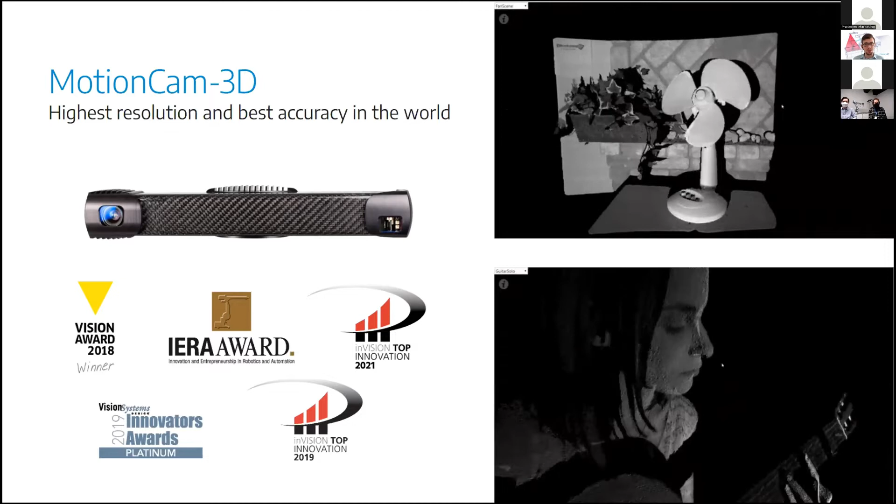So with new Photoneo patented technology called parallel structured light, we bring the state-of-the-art quality and resolution of structured light scanning into the 3D reconstruction of highly dynamic scenes. This novel patented technology uses a clever sensor design which performs the acquisition in one snapshot as opposed to the sequential scanning of a standard image sensor. This means that the parallel structured light method practically freezes the 3D scene in time.

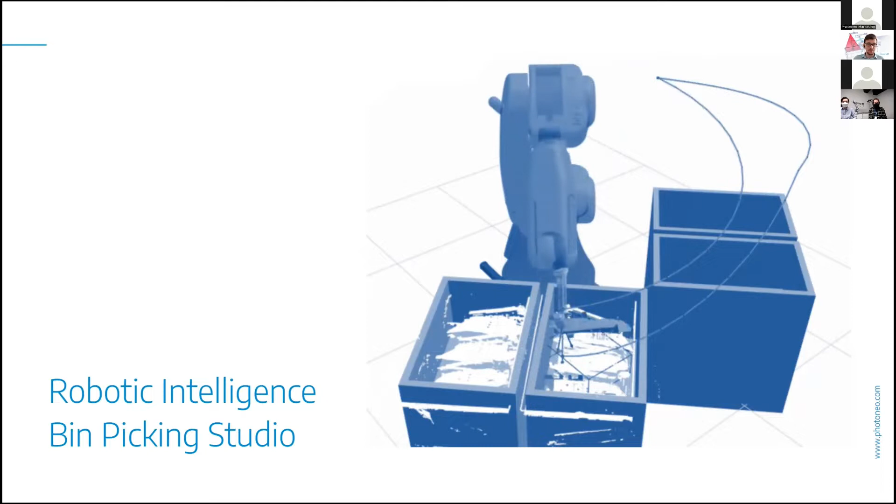Our motivation is transforming the experience and knowledge from projects delivered by Photoneo into a product that enables our partners to deploy robust and reliable bin picking applications. And this is all allowed by Bin Picking Studio. Photoneo is also offering multiple localization approaches for different industrial areas, such as general industry, machine tending, plastic industry, foundry, logistics industry, and parcel handling, or even the apparel industry.

In Photoneo, we believe that the best outcome from 3D vision guided robotics applications lies in close cooperation with robotic integrators and our customers. Therefore, we always want to express the possibilities, but also limitations when it comes to the customer requirements on the bin picking application.

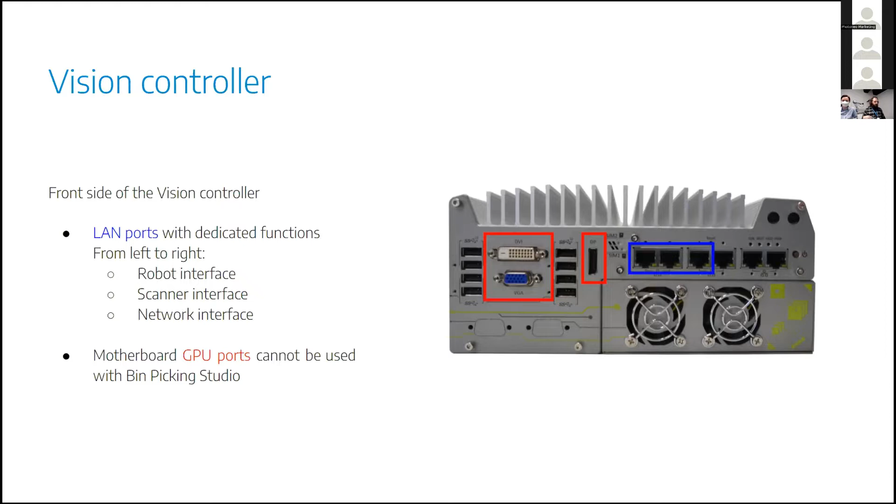So the whole topology consists of at least 4 parts, the minimum: the vision controller, PhoXi scanner, robot controller, and the robot itself. Of course, as mentioned, you can have more than one scanner connected to the vision controller via switch, and then you can have the vision controller connected via other means to another PC, which can be controlled.

The data from the scanner are used to generate the point cloud, where the localization engine is searching for the parts you want to find there. This information is obtained via the vision controller to get where the part is in 3D space, and then this information is transferred to the robot controller to calculate a precise trajectory, and then the robot controller will guide the robot movement.

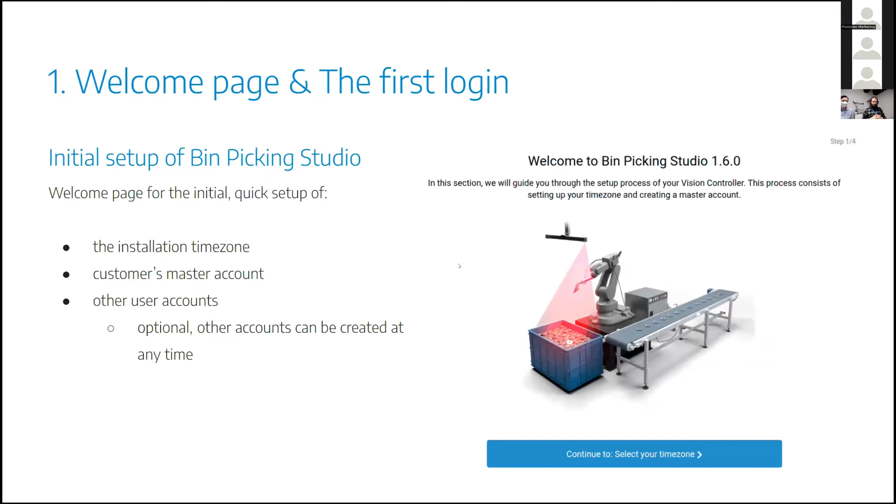So the first thing that you will see is the welcome page, where you can set up your time zone and then set up your account. You can set up multiple accounts with different privileges. You can also configure this later. Then you will be asked to log in. So your solutions are always protected if you use the password.

So then you will see the main Bin Picking Studio interface, where you can see the solution list and all other panels. The deployment page will take you directly to the deployment of the solution. There is also this PhoXi interface, which is the interface of the 3D scanner. Then you have the network page, which is necessary to set up before you start with the bin picking, because all the communication is handled via TCP/IP. So we need to set up the IP addresses correctly so the scanner and the robotic controller can communicate with the vision controller properly.

There is also this menu button, the 3 horizontal lines in the top right corner, which offers some additional options. There is the account management, where you can set up more accounts or change the privileges. The most important one is the documentation, where you can find also this presentation and all necessary information about the Bin Picking Studio and all of its parts. There are also pages dedicated to each robotic brand, which will help you to set up your solution with the particular robot from the brand.

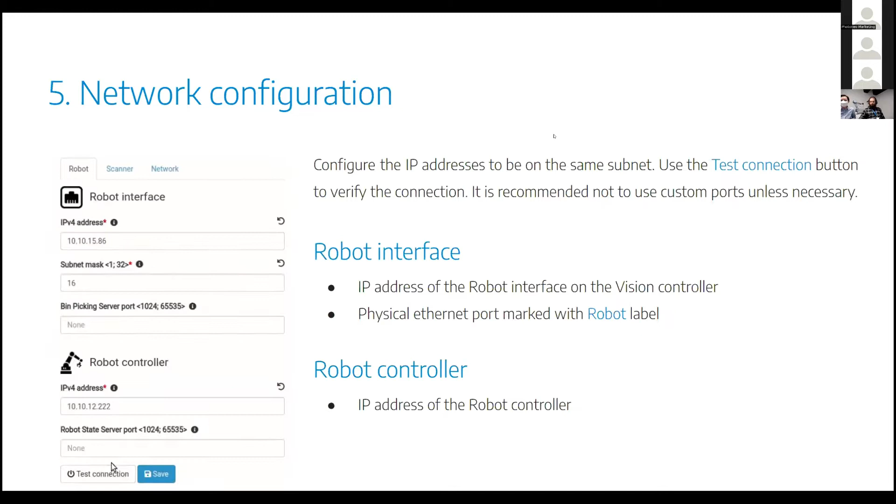Yeah, okay. If you are not sure about what you are doing, or whether you have the right IP address, you can always go through the documentation, where you can also find this training material of BPS. Okay, when you set up your IP address, there is this button called test connection. If everything is set up properly, you will receive this message that the robot is available.

The next step was PhoXi, which is the connection to the web application that controls the PhoXi 3D scanner. There is also another application called PhoXi Control, which also helps to set up the scanning parameters.

The web interface is just for really quick visualization. If you have really easy parts, it's easy to set up with just the web interface. But with more problematic or difficult to scan parts, we recommend to open PhoXi Control and set up your scanning parameters there.

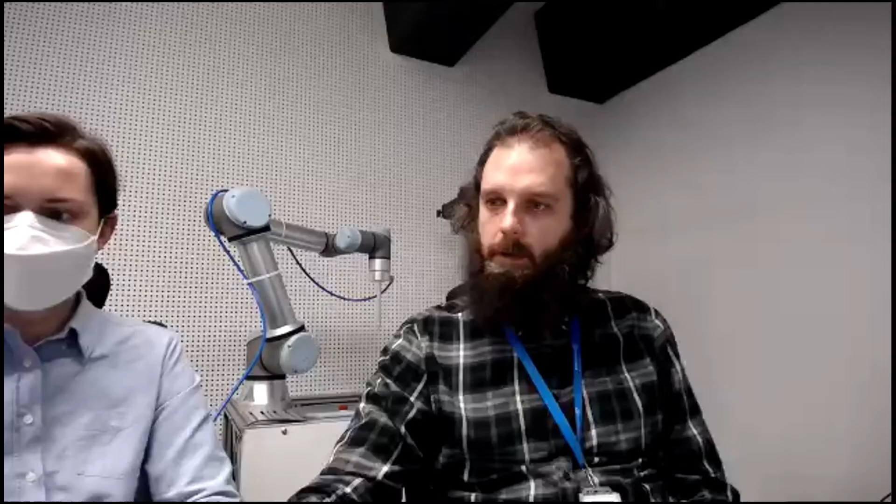So now we will go to Bin Picking Studio itself and show how everything we mentioned in the presentation really looks in Bin Picking Studio. So now we are in Bin Picking Studio itself.

Okay, so this is the solution page where we can see the list of our solutions. Each one has its unique ID, the robot used, and all the flags and all the actions. Here on the bottom, we can see the news about the new Bin Picking Studio 1.6.0. So it's all listed here if you have experience with the previous versions of Bin Picking Studio.

We have the deployment page. Here we can immediately choose from the ready solutions the one to be deployed. Next is the PhoXi tab. As mentioned, here is the quick access to our 3D scanner. We can trigger the scan, and we can directly have a visualization of the point cloud we have.

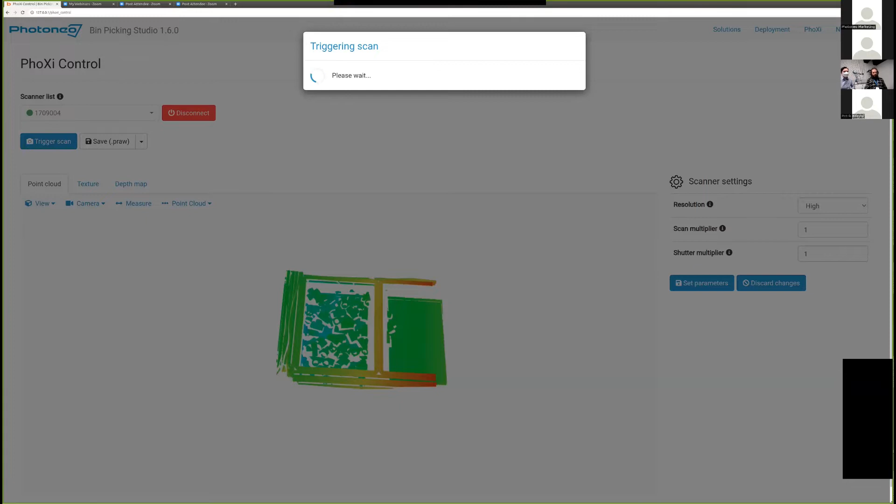Also, we can choose to save the point cloud in different formats. Maybe I can change the scene a little bit and rearrange our parts. See that, they will appear in the other video. So as we change the scene, immediately after we trigger the scan, we can see that we had the scene change, and we have a bit different point cloud now.

Then we can show you the PhoXi Control application. So you can see the point cloud here on the screen now. So we can check if we are satisfied with the point cloud, and then maybe modify some settings. You can see some selected profiles. There is one for strong ambient light, shiny material, default. Usually default should be enough for most of the parts, but feel free to check the other profiles if needed.

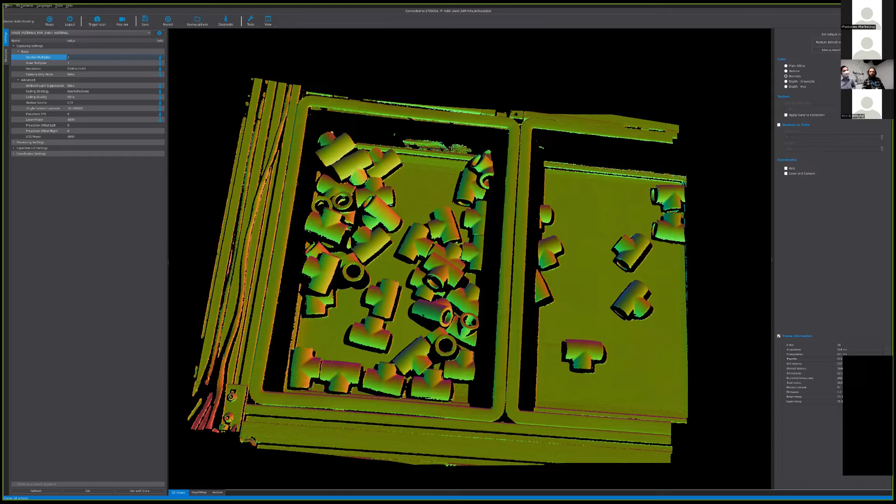You can also check this to have normal sticks, and you can see that almost every point has its normal shown. Is this what you asked for? The resolution can be changed in this left panel. It's the problem.

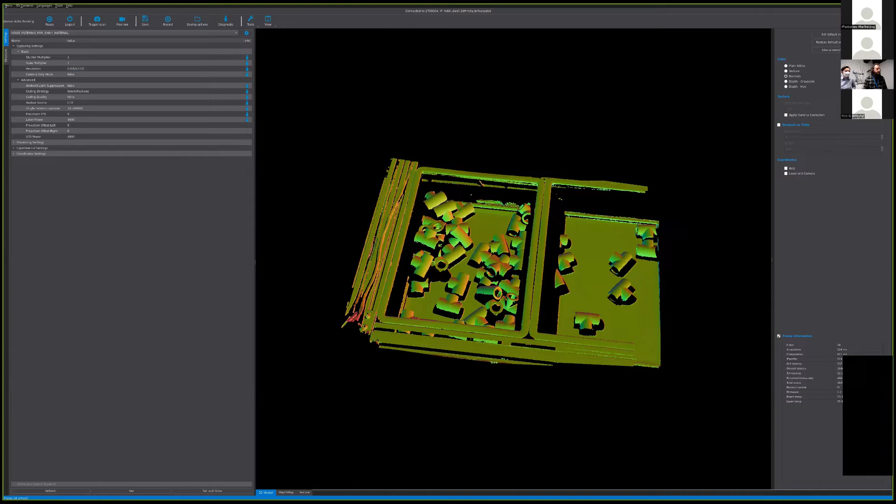I know it's a bit small maybe for you to see, but here are all the three options that were in the Bin Picking PhoXi page: the shutter multiplier, scan multiplier, and the resolution. For example, we can change the resolution to half resolution, set the parameter, trigger the scan and see the difference in the point cloud. The parts are quite easy, so there are fewer points, but the point cloud is still quite okay.

Yes, so the PhoXi Control is not the scope of this training, but we can maybe go back. We just wanted to show you that all the scanning options can be changed in the PhoXi Control. That is accessible and installed in the Vision controller.

Yeah, we understand that they are small, so I don't know how to increase them or change it for better. So okay, we will now continue with the presentation, I think.

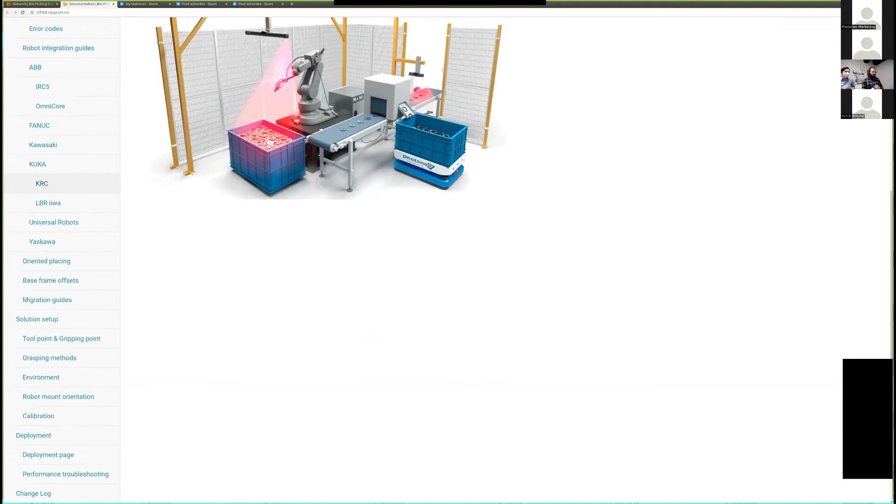So we are again in the Bin Picking application, and here in the top right corner you have this options button where you have the account management and so on. And here, directly on the vision controller, is the documentation, where you have everything set, as I mentioned. Every solution step has its own page here.

We will get there. Every robotic brand has its own page here where you can access all the information regarding connecting your robot to Bin Picking Studio and using Bin Picking Studio with that particular robot. Also, you have this presentation available here. So the whole presentation is here as well, so you can access it even after we finish this training. So let's go back to the presentation.

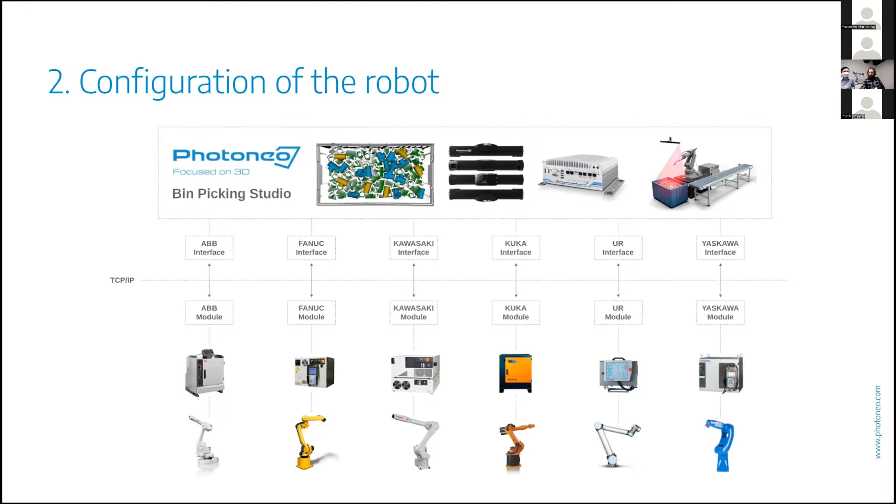Here is the list of the supported robots in Bin Picking Studio. As I mentioned, the robotic module is for each robotic brand, and we can send it to you on request at our support email. The whole guide on how to set up your robot with Bin Picking Studio is in the documentation, as I show you with the Universal Robots example. We have one here. There is a whole list of necessary steps to connect your robot with Bin Picking Studio and the vision controller.

There are also the example programs, really easy ones. The first one is for easy bin picking, the second is a multiple vision system example, and the third one is the change solution example. So for your particular application, you can get inspired by these three robotic programs and write your own program for your specific needs.

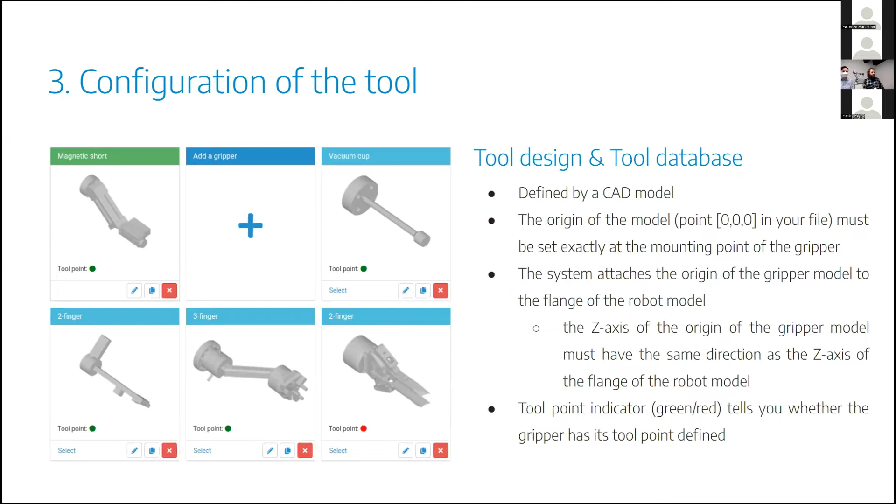Here you can add your own model. The dimensions of the model must be the same, or as close as possible, to the real ones. But keep in mind that the model itself will be used for collision checking calculations. So it's good or almost necessary to have this model as simple as possible, a few kilobytes, and the origin of the gripper must be in the mounting point of the gripper. This can be changed in, for example, MeshLab, which is also pre-installed on the vision controller.

There is a question. Is it possible, in order to ideally adjust the field of view scanning volume, to project the laser and see the edges where it's mounted? Or else, how would you suggest? Very easily, you can check it in the PhoXi Control application itself. But this feature is not available in Bin Picking? Bin Picking controls the PhoXi scanner in an interface that has some limitations for setting up parameters, but it takes the point cloud generated and visualized in the PhoXi Control application.

So in your application you can prepare the solution, then open the PhoXi Control application, arrange the scene, check the parameters, and make sure that everything works as you desire. Then you can check in the vision system page, we will get there in the afternoon, whether the localization is working well. If not, you can adjust the scanning profile and scanning parameters again in the PhoXi Control application, get back to the vision system in Bin Picking Studio, try the localization again, and see if everything works. By repeating these steps, you can get the best possible scanning parameters and localization profile, and then you can proceed further and finish the solution.

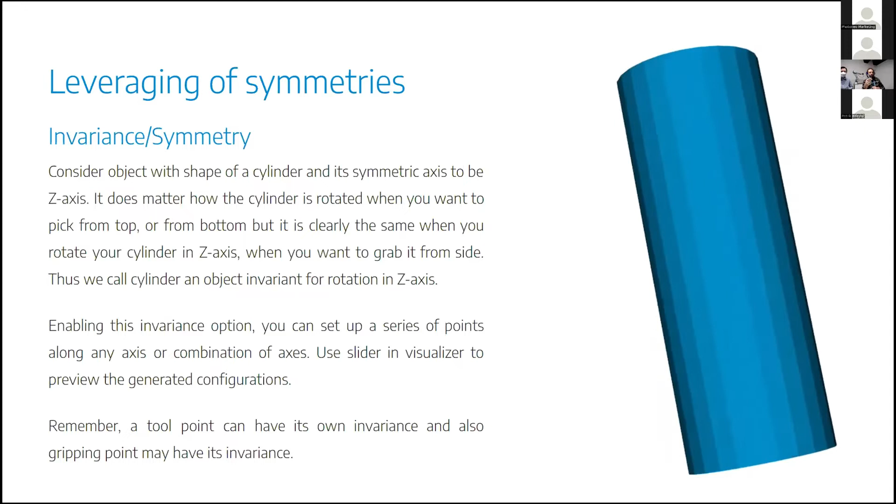But if we turn on the rotational invariances in Z axis, like we showed you before, then all the options become available, so the gripper can be rotated, and we will gain more options for how to pick the parts. In this example on the screen, the z-axis invariance is also enabled, and the number of steps is 8. It's not a good idea to have too many steps for these invariances, because then the algorithm will have too many options from which to choose to calculate the trajectory to pick the object. So it's good to have some invariances, to have more options for the robot to pick the part, but not too many.

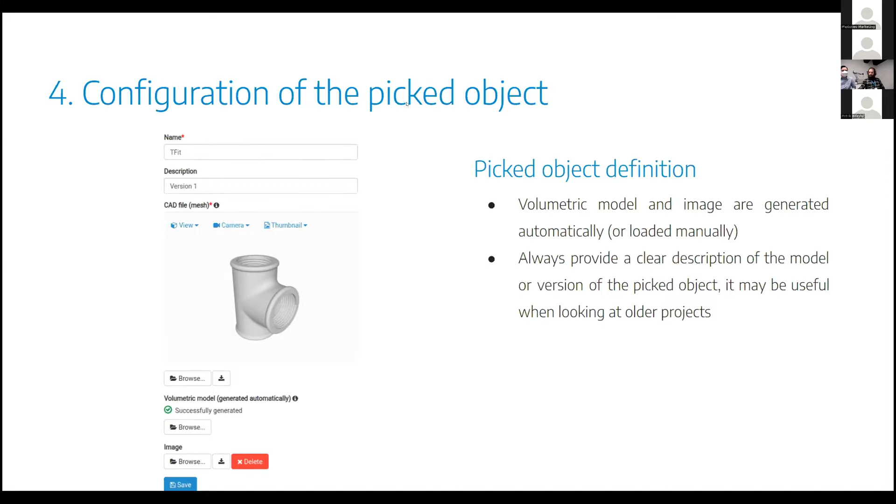Okay. It is mentioned also here that the size should be low, and just make sure that the model is whole. Like in this example, you can see there is a hole in the 3D model, and it won't work well, or even won't work at all when you have a CAD model like this. So they should be enclosed, and in case they are not, the volumetric model might be incorrect, and you will have some problems later.

Okay, so I think now it's a good time to have a maybe. Okay, we will see just another question.

Maybe Patrick can. Yeah, the first one I asked Patrick to answer, and there is another question: what if our objects are always the same model but in many different colors? As you may know, the PhoXi 3D scanner does not work with color. It generates a point cloud from the objects. The texture, notice that it's black and white.

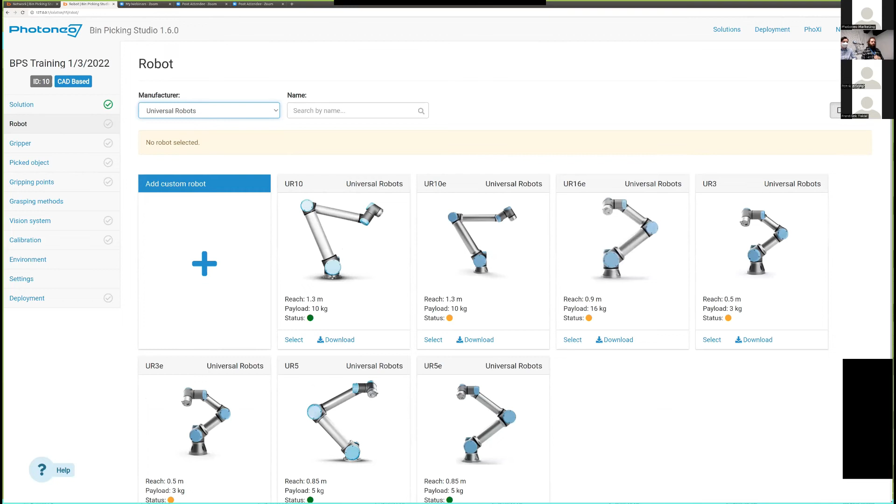So here you can see there are a lot of available robots we can choose from, but we know that our robotic brand is Universal Robots, and our robot is this one. So we can just select it. You can notice that it has a green dot, which means that it was tested in our headquarters. That's it. The robot is selected.

Next, we'll move to the gripper. Here we have a few grippers already available, but we will add a new one as in the presentation. So we just click add the gripper. The name, so we can recognize it, will be vacuum, for example. We will browse the disk for the STL file. So it's this one. We can just open it. When we hit save, it will generate the volumetric model of the gripper.

And in the visualization, we can zoom it and check if it corresponds. You may notice that the origin is in the mounting point of the gripper. So here is the place where the gripper is mounted to the robot. So you can check here that it's okay. Next is the tool point page, where we can change the position of the tool point, so where the gripper is touching the picked part.

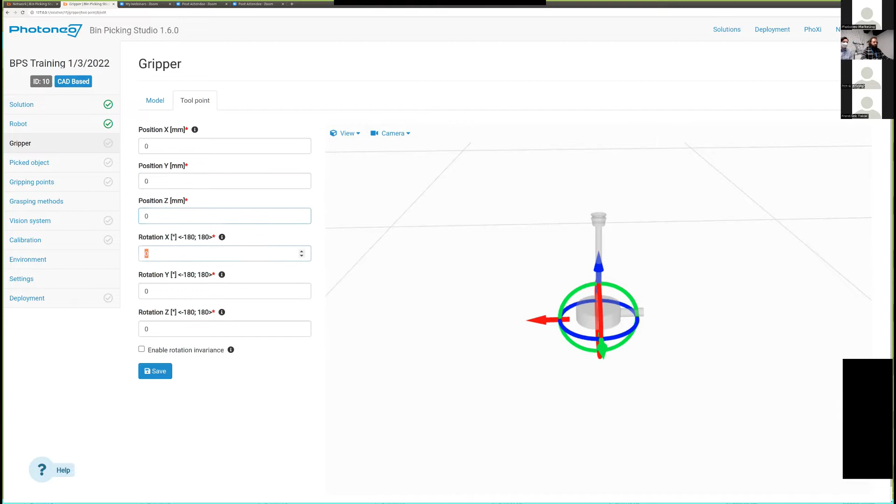As mentioned in the presentation, we can either use the visualization and these arrows to move the tool point in 3D space. We can rotate it and do whatever we want, or we can use these fields to directly type something there and change the position. So we know that it's a suction type, so we know that the touching point, or the tool point, is on top. So we can move it like this. The red dot is the actual tool point.

Don't forget that this setup is not permanent, so we can change it anytime later if we, for example, discover that the tool point is too deep and it's pushing into the part, or it's too far away from the part, so we can then adjust it and move it according to our needs. I think I will move it a bit up, like this.

You may notice, or maybe not, that the model is not exactly like the one we are using. The end is made from rubber, and it's dilating. So when we pick the part, it gets pushed and shorter. That's why our model is shorter by this length, and that's why we just place the tool point exactly at the edge of the model. So we will avoid collision of the gripper with the point cloud. Let's put it at 180, and if needed, it can be changed when you perform the deployment.

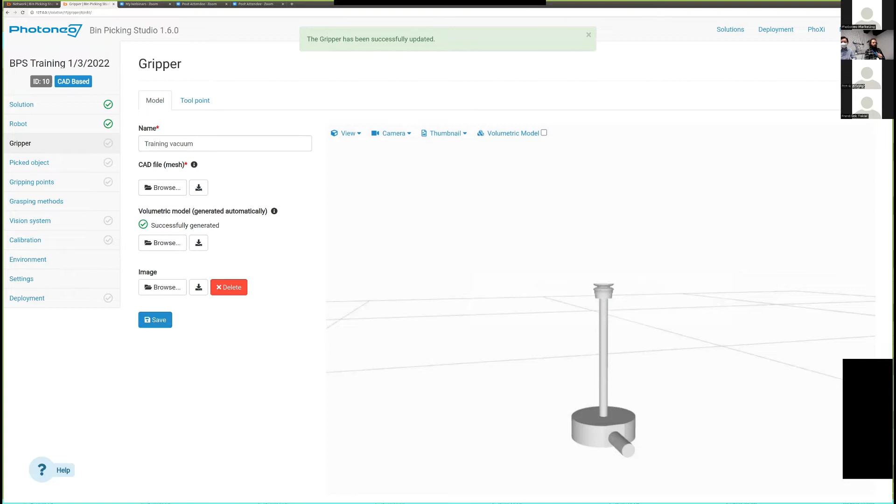When we are satisfied with the settings, we just hit the save button. The tool point has been updated and everything is saved. So we can save the gripper and we can proceed to the picked object. As mentioned, we can add up to four objects into BPS Studio. Adding a picked object is similar to adding the gripper.

Just click to add the object. We can name it; in our case, it will be fitting, for example. We can add some description, but it's not mandatory. The only mandatory thing is the CAD file. So let's find it. For us, it's this one. You can notice that the file size is 487 kilobytes, so it's a really small file. Similarly, the gripper has only 384 kilobytes, so it's a really simple model. So we'll open the file. It's saved to generate the volumetric model.

And in visualization, we can check if it fits. Yeah, we can check. Yeah, it's really our object. So we can also choose the thumbnail like this. Set the thumbnail to the current view, and when we save it, the thumbnail will be as the one we saved.

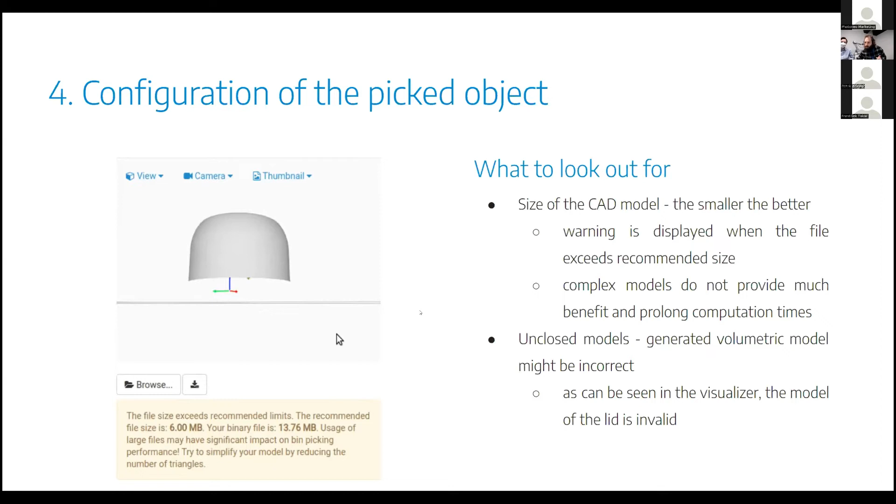The priority can be set up as well for each gripping point. It's not the priority to pick objects by that gripping point, but to pick a particular object with that gripping point. I'm not sure if it was well said. Let's say it like this.

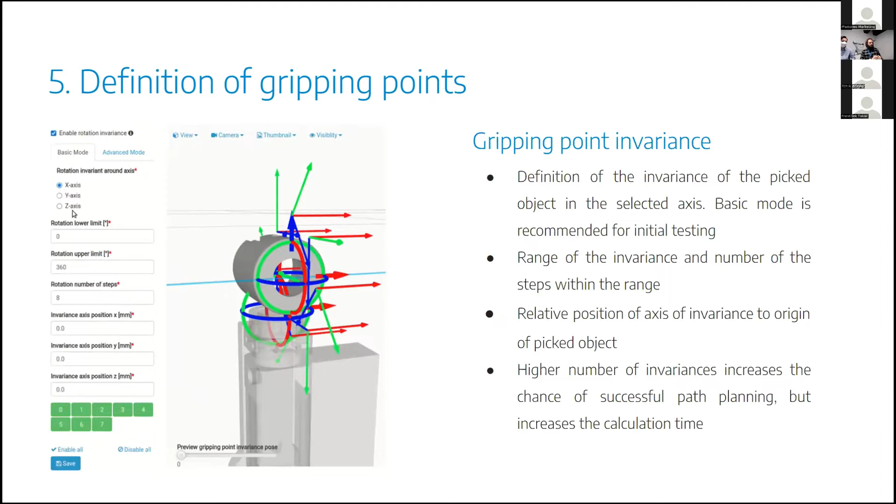You can also check the presentation. They are using a magnetic gripper, and the part is symmetric in the whole X, so it's easy for them to create the invariances over the gripping point. It's similar to the invariances with the tool point. We want to have multiple options for how to pick the part, but not that many, so the calculations are quick and the cycle time is low.

There is an option also to teach gripping points. It's often used with difficult parts or difficult grippers. It cannot be done directly. You need to run the calibration, which we will do in the afternoon. And then you can teach the gripping points: you attach the part to the gripper as you want it to be picked, and then scan it and teach the gripping point in the Bin Picking Studio.

Okay, there is also an option to achieve an oriented placing. As you may notice, I mentioned that each gripping point and also its invariance has its own ID. So we are able to send to a robot the combination of numbers, the IDs of the gripping point, so the robot can exactly know how we pick the part. So for example, if we took our part, we can call this gripping point 1, and this will be gripping point 2, and this will be gripping point 3.

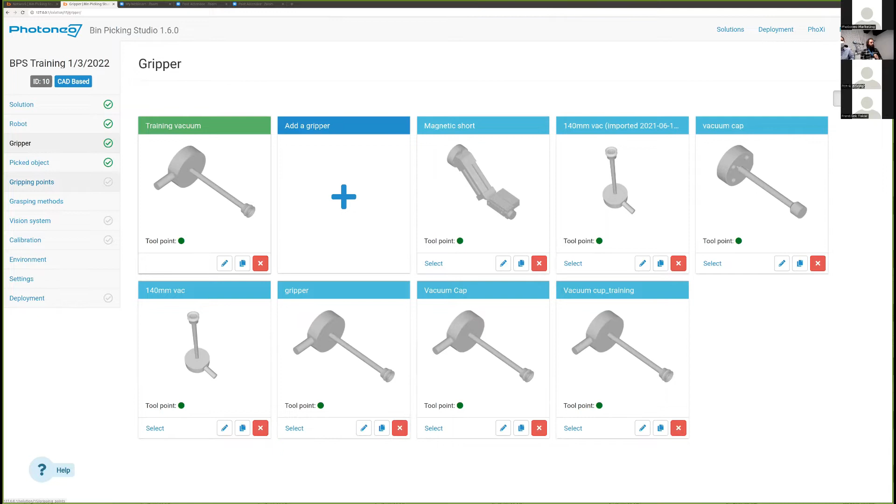Okay, so we are back in the Bin Picking Studio application. So we jump to the gripping points. New gripping point. We can choose here our picked object, since we have only one, so the first one is selected, and its ID has already been selected. We can change it, but it's not necessary. And now we click add new gripping point. So here we are in the interface. Immediately the visualization is giving us the model of the gripper, the model of the part, and you see they even connect in some way. It's not the ideal one, but still.

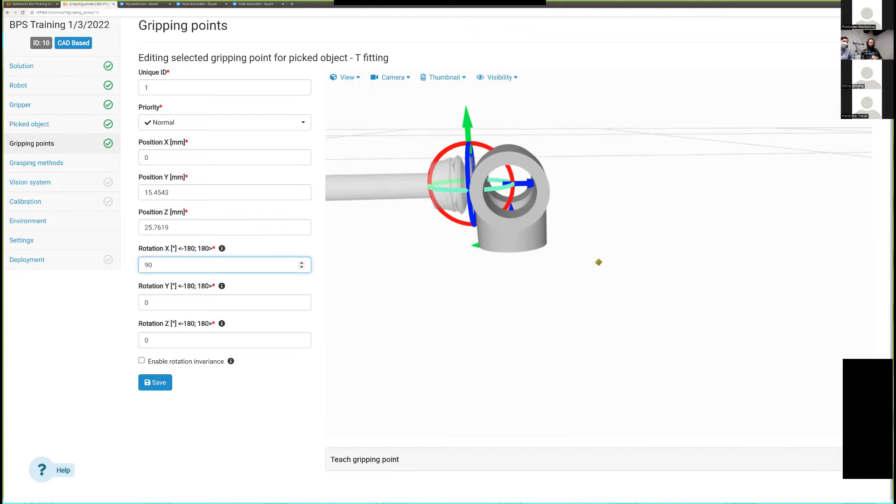So now we can position our gripper in the way we want the part to be picked. So let's try to rotate it. We want to pick it from the side. Yes, so we can use the numbers here or use this. So we know that we want to pick it from the side. So let's move it like this and move it a bit closer. Again, if we made some mistake or put it too far inside or too far away, we can adjust it later after we test the deployment.

So let's see. Let's have it like this for now, and let's turn on the rotational invariances. Again, the default is X, 8 steps and 360, a full circle. You can preview the invariance. We can see that no, this is not a good idea for us. So let's try Y. Well, this is not good either. So let's try the third option. Okay, we are getting better, but the rotation point is not where we want it to be.

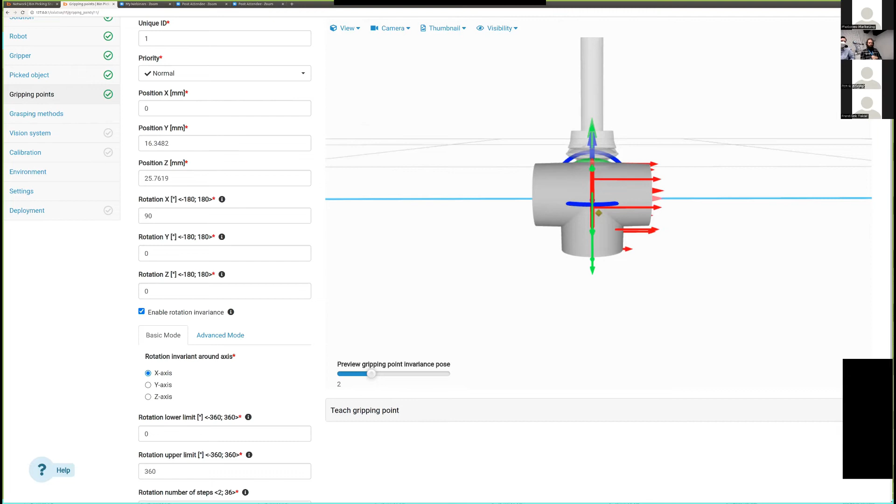So we want to move it inside the part. And like this, let's preview this. Oh, okay, it's much better. But we need to adjust it a bit more. Okay.

No. But we know that 360 is not good for our part, because from the bottom there is a hole and we won't be able to pick it like this, of course. So that's why we limit this to just 180. So let's see how it looks now. Yeah, this is what we want to achieve. Just pick the part from this radius where there is an option for the suction cup to actually attach.

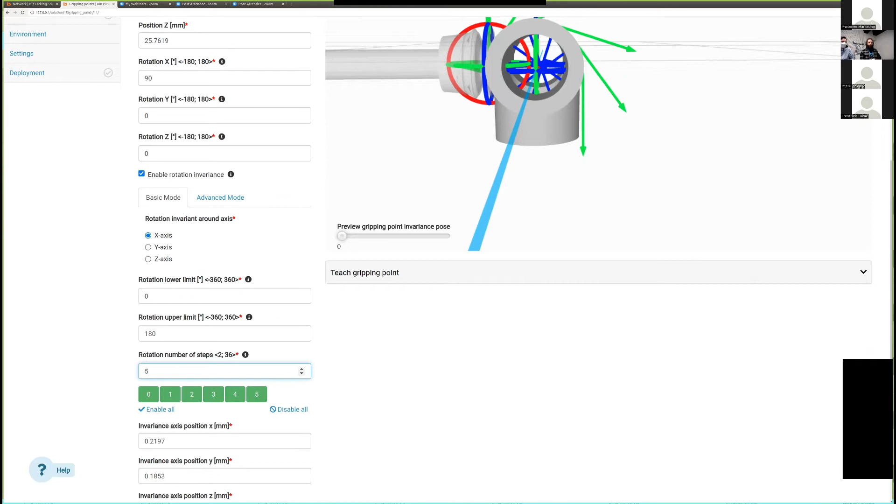So, also in this case, I think it would be better to lower the number of steps, because 8 is, I think, too much for this really small part. If it were larger, obviously it would be better to have 8 points. But for this, I think maybe 5 should be enough. But let's see how it looks.

Yeah. Now it looks quite okay. So when we are satisfied with this gripping point, we just hit save, and the point is updated. We get the green tick, and this setup is complete.

We will now conduct the grasping method. We will switch to the presentation again, show it in the presentation, and then we switch back to the solution and show it in the Bin Picking Studio application.

So, grasping method. In 1.6, this page got a new look. You can now set up multiple grasping methods from 1.6 on. Before, there was only one per solution. So now you can set up a grasping method for each vision system separately. It's very important to choose the correct grasping method. It consists of 5 mandatory waypoints.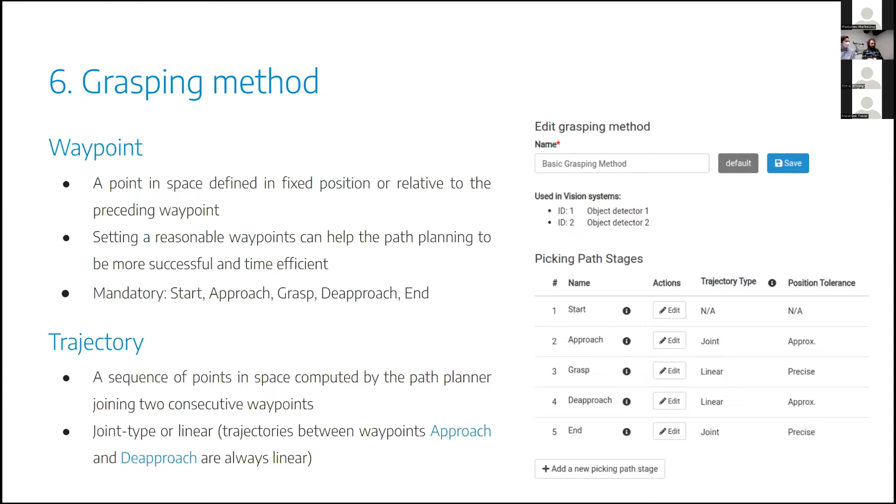Yeah, most collisions happen in the bin area, so that's why the grasp should be more precise, and the movement there should be linear, so we avoid all possible collisions. When the robot is outside the bin and there are no other objects, the trajectory can be curved, because there should be no obstacles where the robot can collide. Okay.

So let's go to the start position. As mentioned, it is the start of the bin picking routine. It's defined in the robot controller. Usually it's the same waypoint as the end one. It's called by Bin Picking Studio via the initialization procedure. And as I mentioned, it's usually defined above the center of the bin.

Then we have the approach. The gripper is moving to the position above the part to be picked, so it's prepared for the actual picking. Usually the found gripping point offset is used, so that we tell the robot to go above the found part and then do the grasp procedure to actually pick it.

On the right there, you can see that the type is approach. We can choose the origin of the relative offset. Mostly the found gripping point is used, but you can choose the other one, the robot base, depending on your application. Then you put the relative offset value in millimeters and choose the position tolerance, and whether the trajectory is linear or not. You can also call some procedure if needed.

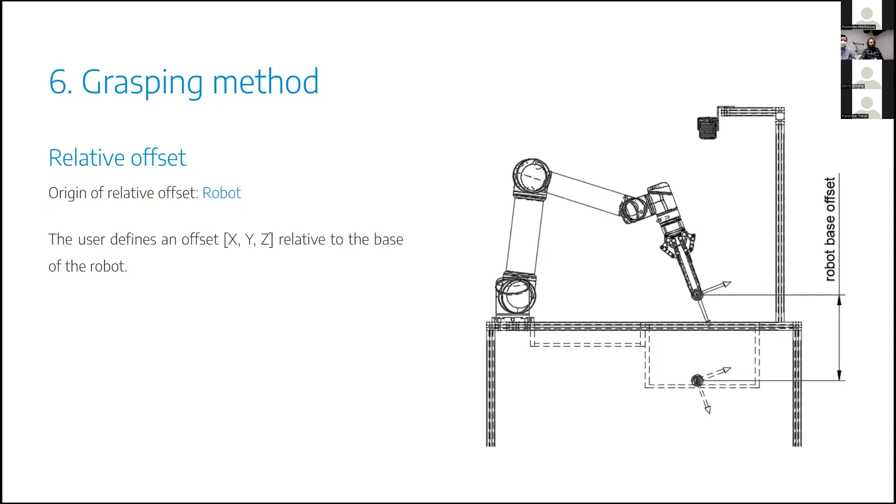Okay, so the next mandatory waypoint is grasp. It is the gripping point of the object that is ready to pick. So in this point, you can call the procedure attach, for example. In our case of vacuum, attach will mean that we will turn on the vacuum and attach the part to the gripper. In the case of magnetic, you will turn on the electric current to start the magnetic gripper.

So we can probably move to the deapproach. It's different from the previous one. So when we approach the part and grasp it, now we want to move it. Now it's a good idea to think if it's a good idea to again use a relative offset of the found gripping point, because in this case it will go like this. And possibly your workpiece will collide with other pieces in your bin.

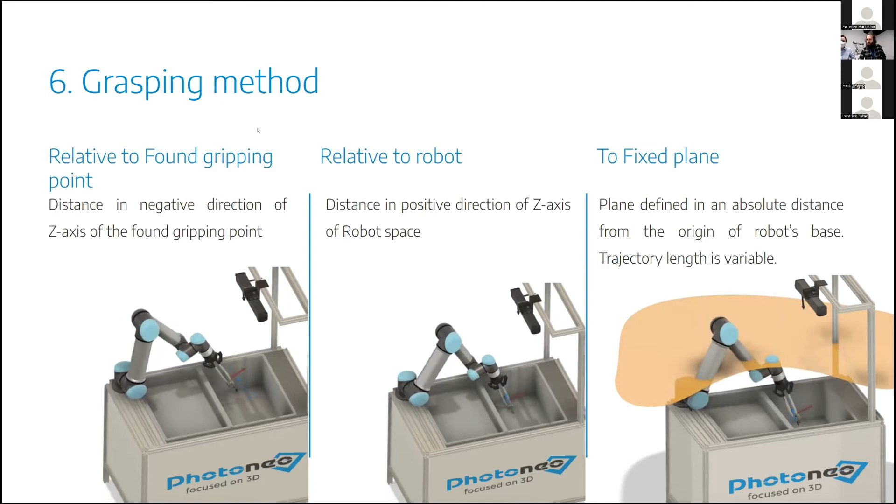Hopefully, we answered your questions. Okay. I move back. No, this is the fixed plane. No. That's what we just explained, yeah, that this is used when we have a really deep bin.

And another thing is when you are defining the start and end position, the best thing to do is to define the start and end position close to the bin. So you are sure that the trajectory is not calculated over the whole space, but you will reduce the space and you will save some cycle time. Also, as mentioned, if you set your start and end position above the bin, it can be used as a relative offset point to help pick parts that are close to the walls of the bin.

So here are some. So the endpoint, as mentioned, is usually where the start is, the end of the routine, and it's defined in the robotic controller. Yeah, there is also an option to use as an offset point some custom point defined in the 3D space. The space is calibrated, so we will do it in the afternoon.

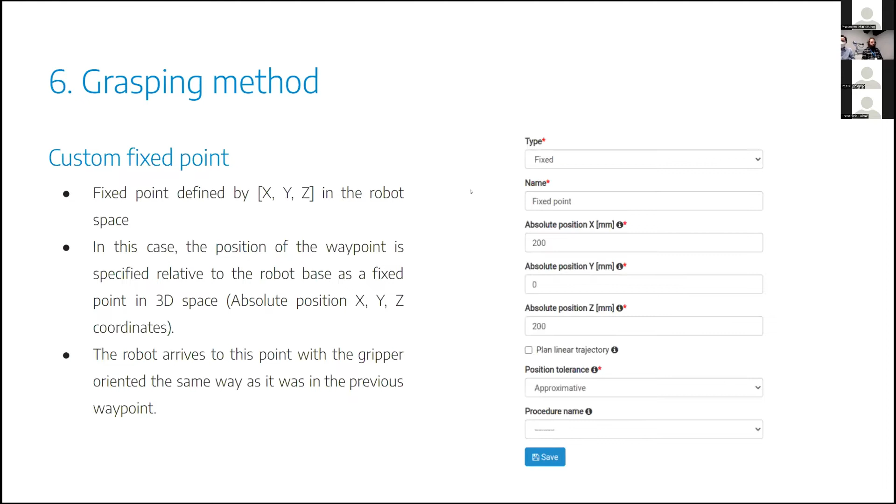So it's also an option. Okay, so this is it for the presentation now, and we will go back to our bin picking application. I will just change the sharing. Yeah, so we finished by setting up our gripping points. So let's save it. Okay, save, and let's go to the grasping method.

So we have already here created a basic grasping method. You may notice that here there is no green tick, because by default there is already a grasping method. So even if we do not set it up there, we could deploy this solution, because there is this method, as mentioned, with all 5 necessary mandatory waypoints. We can go through them. So here we have start, where we can call a procedure, but we will call none. It is defined in the robotic program.

Then we have the approach. For now, the default is found gripping point, and the relative offset value is set to 10 centimeters. In our case, I think that we have set up the start and end position in the middle above the bin, so we can keep this approach like it is. For us, as mentioned, the origin of relative offset found gripping point is the best variant here.

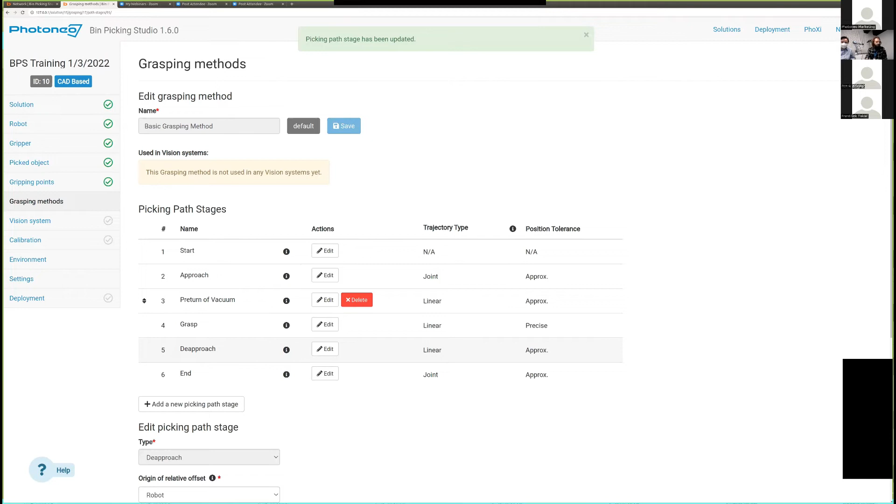And then we have the deapproach. The default value of origin is set to robot, so it will move the part directly upwards. We can keep the 10, or it should be about the bin. Yeah, I think we should increase this value, right? 15, for example. I think 10 is just the height of the bin, so we will change it to 15 centimeters. Okay. So the end is also set in the robotic program.

Okay, next question. From the moment of grasping and while approaching, in some setups we could move close to the sensor. How to ensure that we will never end up hitting the sensor? You will get there in the afternoon, but I will just point it out now because you asked. There is this environment page where we can add a simplified model of our cell and place it there, and the robot will know that these things are there. If we open the environment now, I can show you, so it would be better to answer your question right now.

If I click on the environment... oh no, never mind. No, okay, there is no vision. We need to set it up. Okay, I cannot show it now. We didn't calibrate the camera with the robot.

Normally, when you do this step by step, go through the grasping method and set up your vision system where you tell exactly that this vision system contains this scanner, in the environment page you will see the robot and the 3D model of the scanner. So from the beginning, the Photoneo solution knows exactly where the robot and the 3D scanner are. And if you've done the calibration, the robot space and the camera space are calibrated, so the robot knows exactly where the scanner is, and when the path planning is calculated, it will avoid it.

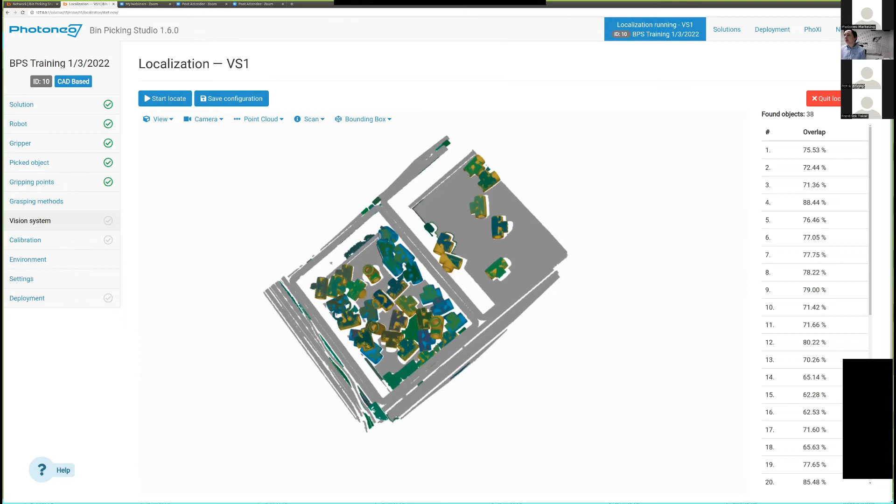So the scanner triggered the scan. We already have the point cloud, and as you know, the objects we are searching for are these T-shaped plastic workpieces. The first thing to spot is different colors. The gray one is for the background, and there are different shades of green. This point cloud is divided into green segments, and each segment is potentially our search object. So this segmentation is the key parameter to have really successful localization.

So we have a right part of the right bin and left bin, but we are going to localize objects only on this right side. So what can we do? We can also enable the bounding box. This one is really huge, and this bounding box will define the area in which localization will be provided. So we can just change the size by grabbing the arrows, and maybe this is still too big. We don't want to have a big area to search for the objects. We want to save some computation time.

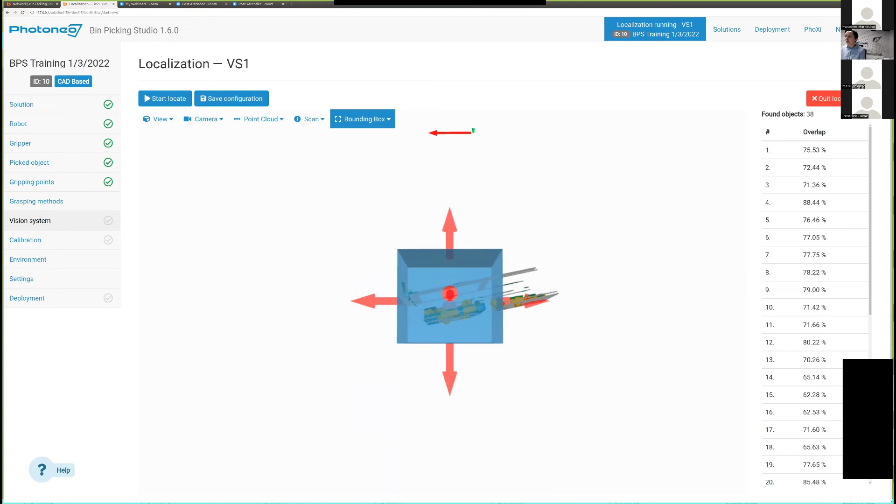So it's still not enough. It's rotated, so we can rotate the bounding box. Okay. We can resize it a little bit.

And I think it's just okay. So when I click on Start Locate, you have to wait a few seconds. You can see that only parts which are localized are in the area of the bounding box.

There are different options like view. You can choose top view, bottom, left, as you wish. There is a point cloud, and if you don't like this green segment, you can, for example, use the black color, and you can also choose the point size. Maybe it's too big,

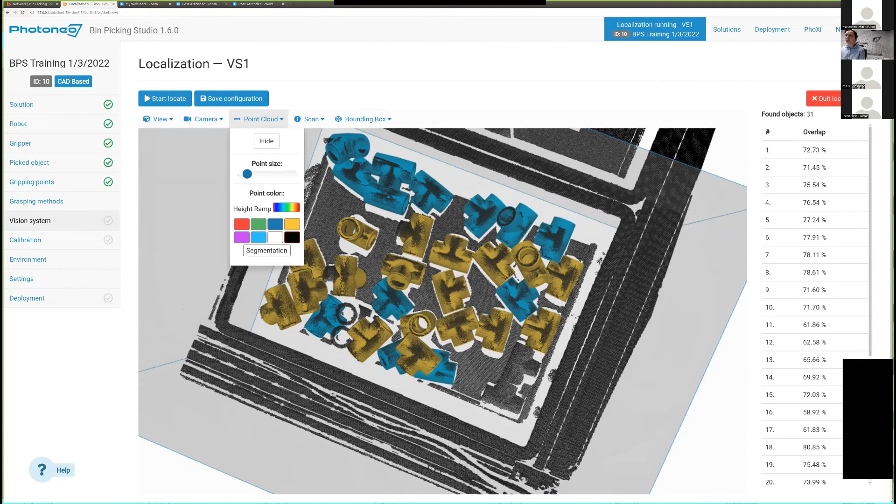but we can scroll on some work pieces and look if the point cloud and found objects really fit together. So I will go back to segmentation because I like these shades of green.

Another thing to see is this table. We can see that localization was able to find 31 objects. Each object has its unique ID, and another parameter is the overlap. You can just click on it and analyze which part is which and what is the overlap. The overlap means how much the localized object matches with the point cloud.

So the overlap is really high, as you can see, but there are also parts which overlap only 23%, and maybe some parts are not found because they are in a strange position, or maybe some of them are turned. Maybe this one. But we will tune it by selecting the right parameters.

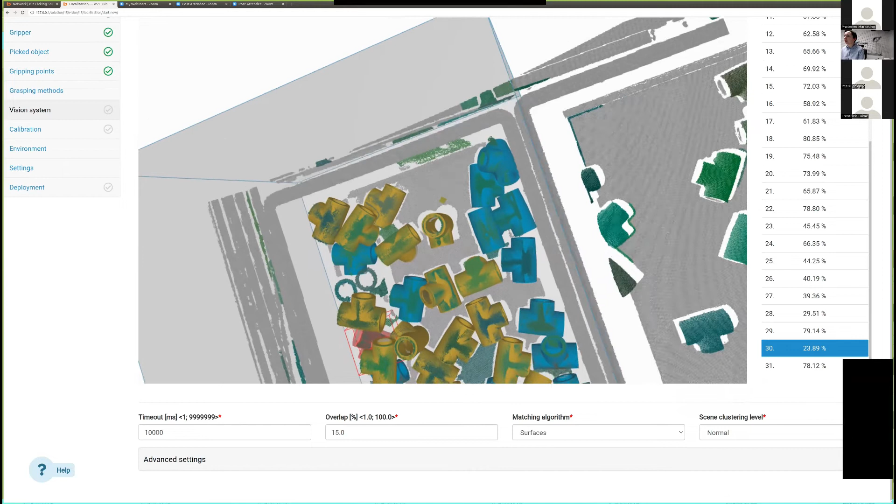So the first parameter is timeout. It's the total time when the localization is taking the scan and searching for the object. When we click on the localization, I will click Start Locate again. Then maybe localization is able to find parts in 5-6 seconds. So I can change it, or maybe I'm satisfied with this timeout.

The overlap says how much of the visible surface matches with the CAD model of our workpiece. So when you set up 15% overlap, which is the default value, it means that at least 15% of the visible part of the point cloud needs to match with your object.

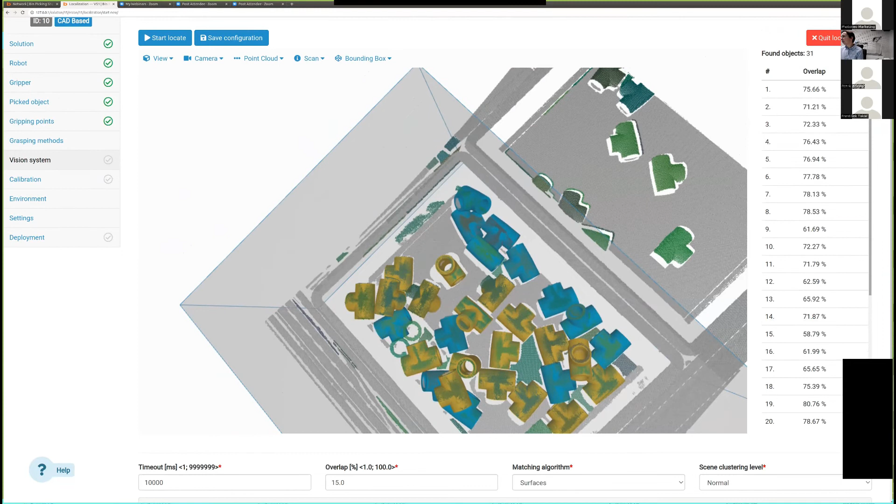That's a really low number, and if you keep it low, then it can happen that your part will be flipped or strangely rotated, and you can see that most of the parts have overlap over 60%. So we will change it to 60. Okay. So 24 objects were found, which is still a very nice number.

These two pieces are not localized because, as you can see, they have the same shade of green, so they are supposed to be one segment. But if you need better segmentation, you can use the parameter called scene clustering level, and there are values low, normal, high, and very high. We have simple small parts, and the default value is normal, so maybe we can change it to high.

And we can start locate and see if we can localize one of these pieces. No, they are still stacked together, but it doesn't matter so much.

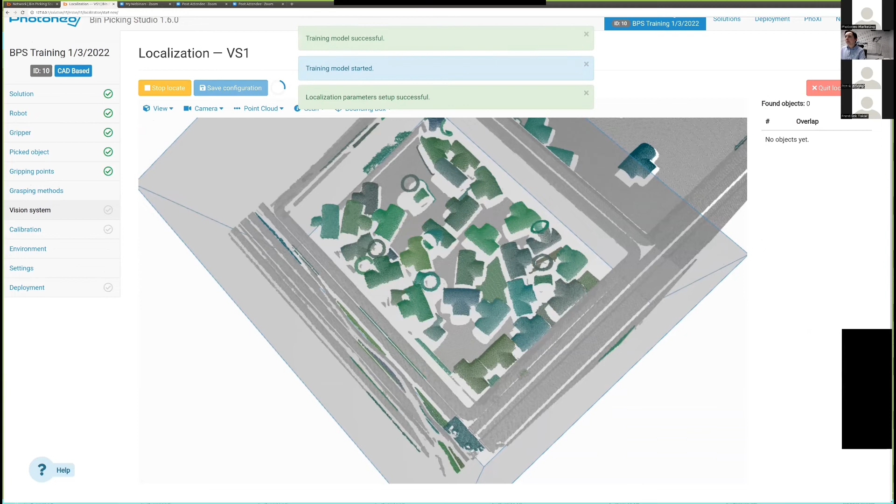Another parameter is matching algorithm. When your workpiece has a smooth surface, you can use the matching algorithm surfaces. When you are searching for, for example, a sheet or cardboard or something very flat, you can use edges. And when your workpiece is quite complicated and has both smooth surfaces and edges, you can use combined. So we will try the combined algorithm, and maybe it will perform a little bit better. Yes, and now you can see that these two segments are recognized.

I think that our localization profile is quite good. There are some advanced settings. Maybe we can go through them very quickly, because in general, when you have a new use case, please try to use the default parameters first. Just look into the table, see what your overlap is, and maybe choose a higher value, because 15% is a really low number. You can change the scene clustering level when you have small, really complicated parts. And you can also assess which matching algorithm is best for your part.

There is global maximum feature fit overflow. What is the overflow? Imagine that you have some very flat surface, and it can happen that there is some background which is part of your point cloud segment. So this is what we call overflow.

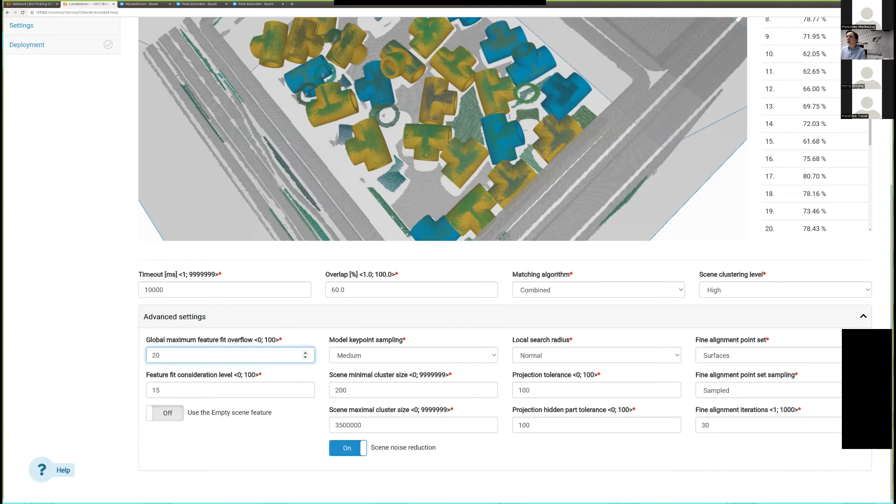And now the global maximum feature fit overflow is 20, which means that 20% of the object can be the overflow. Our scans are really nice, the segments are nicely separated, and the overflow is 20%. Of course, we can go to lower values, but as the localization is performing fine, we can leave it like that. There is also model keypoint sampling.

So the default number is medium, but when you have a very complicated part with a lot of edges, with a lot of details, you can use a dense parameter. And when you have a very easy thing like a box, you can use sparse. So you will also save the localization time with this parameter.

So another parameter which can be useful for you is projection hidden parts tolerance. For now it's 100%, but if you want to see only parts on the top, then you can choose a lower number of projection hidden parts tolerance. But as we have a small bin with one layer, it doesn't matter so much for us.

So if you are interested more in these advanced parameters, just let me know. We can go through them in more detail. But I think I showed you the ones which are really useful.

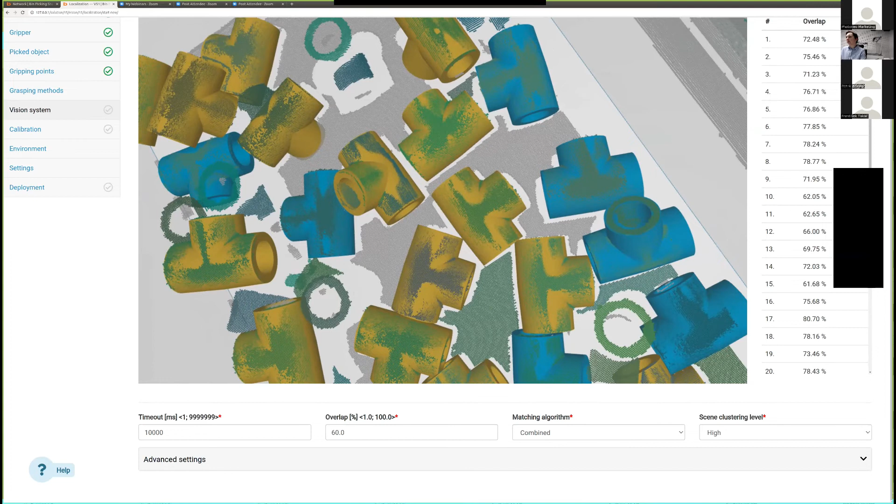So if we are really satisfied with this localization profile, we can save the configuration. So the localization profile is successfully uploaded to the Vision System. The PLC file is created. We will quit localization and we will save this Vision System.

So another thing you can see here is the calibration matrix. When you are triggering the scanner, the parts are localized, but they are localized in the coordinate system of the scanner, and the robot needs to know where the parts are in the coordinate system of the robot base. So to find the transformation between the scanner and the robot, you need the calibration matrix.

For now, we didn't proceed with the calibration, so this matrix is empty, but when we finish the calibration, there will be numbers representing the transformation between the scanner coordinate system and the robot base coordinate system. So we will save it, and you can see that we added the Vision System.

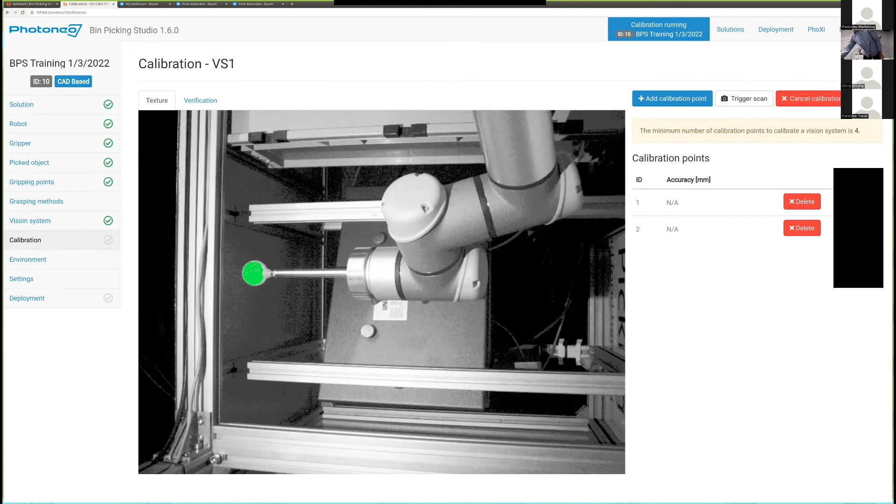Okay, it's really good that we get it, so we can move it differently. For example, here, do not hit the ball. Okay, the ball is visible. The position is different, so another point is added. So we will try another corner of our scene. This is also a good one.

So for now, you can see the red notification says unable to detect the ball. Please try to change robot position and try again. Of course, the ball is out of the scanning volume, so we'll have to move it a little bit closer and under the scanner. So I will just move it to the scanning area. Okay, this point is successfully added. We already have 6 of them. So it's going really great.

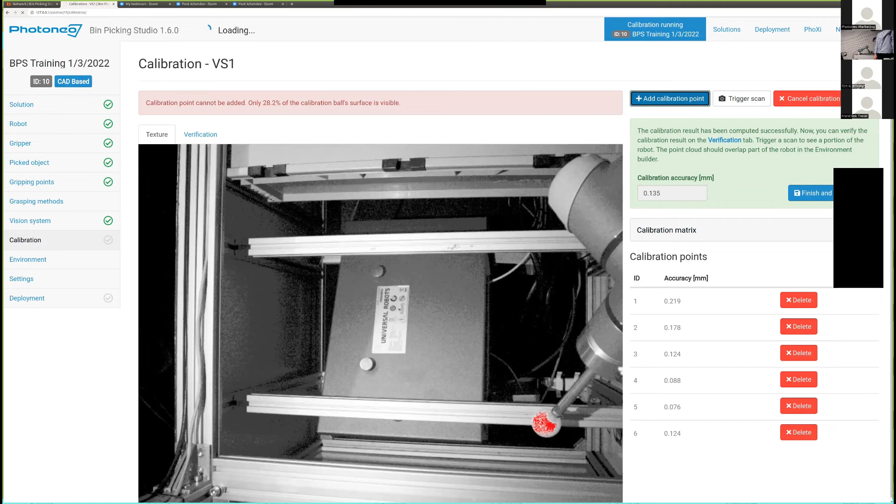Okay, the calibration point cannot be added. Only 28% of the calibration ball surface is visible. So we have to move the robot so we will see a larger part of the ball. So maybe this position will be sufficient. Right? Then this position will be good enough. Okay, this point, and the last one, I can move to the center of the bin.

Like this. And I will add calibration point. I hope it will be successful. Yes, and the calibration accuracy is 0.2 millimeters, which in our case of the robot and the accuracy of the scanner is just sufficient for us.

If we are not sure if the calibration is okay, if we need to decide whether to add some additional point, we can go to the verification and just check how it looks. There is a question for us: I was expecting the accuracy to go lower, below 0.1 millimeter. Why, with more points, does the calibration accuracy get higher and higher?

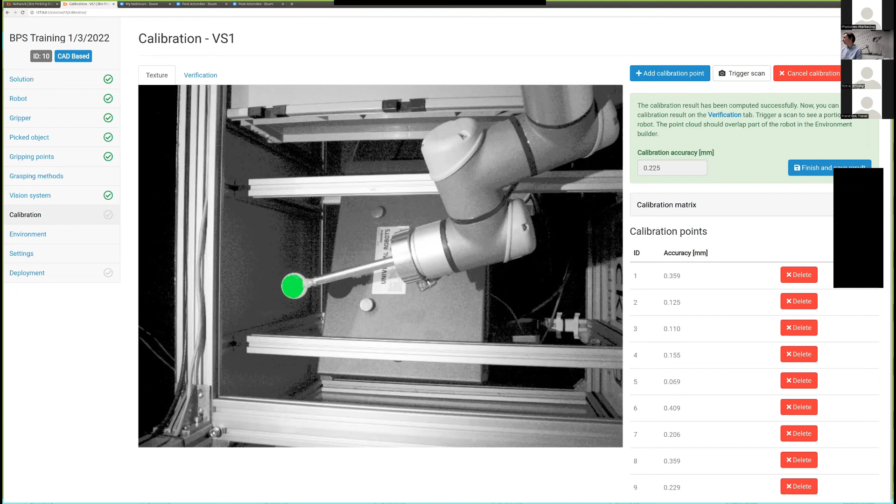So as I said, we can go to the verification of the calibration. You can really see if the model of the robot and the point cloud captured by the scanner really match together. You can zoom in and check it. You can see there is some inaccuracy, but for our use case, it's just sufficient. If we are satisfied, we can finish and save the result.

Of course, if you have multiple vision systems, you need to make a calibration with each vision system separately. Maybe it sounds quite boring, but in the new version 1.6 there is an example program. You can find it in the robot module, and it is called add calibration point. You define the positions of the robot in the space of the bins, attach the calibration tool, and run the calibration through Bin Picking Studio, and the calibration will be done automatically. So you don't need to move the robot. It's much easier.

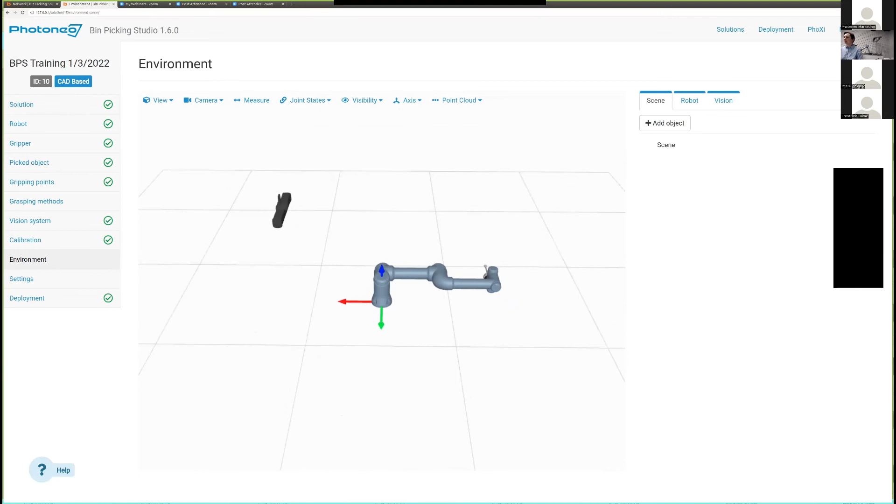So the first thing I'm going to do is go to the vision, connect to my scanner, and trigger the scan. Okay, I have to move my robot. Okay. So I moved my bins back. I triggered the scan, and now I can see the point cloud. I can use this point cloud as a guideline for where my robotic cell is, and use it to add other objects.

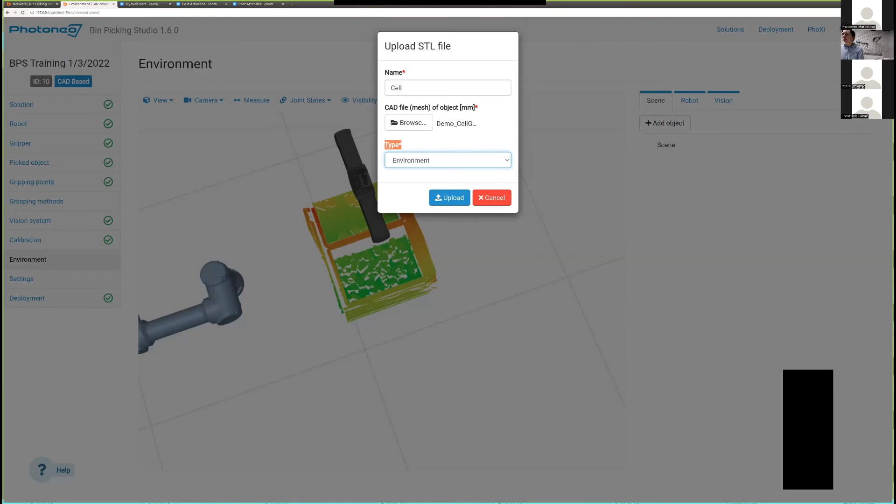So I will go to the scene. I can add objects, and there are multiple options, like upload STL, so you can create STL files of the robotic cell or the bins in any graphical software. You can also make your own box or other objects from this section. But I already have my cell here, so I choose demo cell generated. I will call it cell, very simply, and the type is environment because the cell is part of the environment, and I will upload it. So it looks quite good, the robot is positioned as it is in reality.

And also it looks okay. So I will upload the bins. There is the left bin, so I will call it bin L, and the type of the object is bin. I will upload it. So I have my left bin uploaded.

Okay, then I add another object, the right bin. I need this one, so I will call it bin right, and the type of the object is bin again. So I will upload it, and I can check if it matches with the point cloud. It's a little bit shifted, so I can click on it, and maybe I can move it a little.

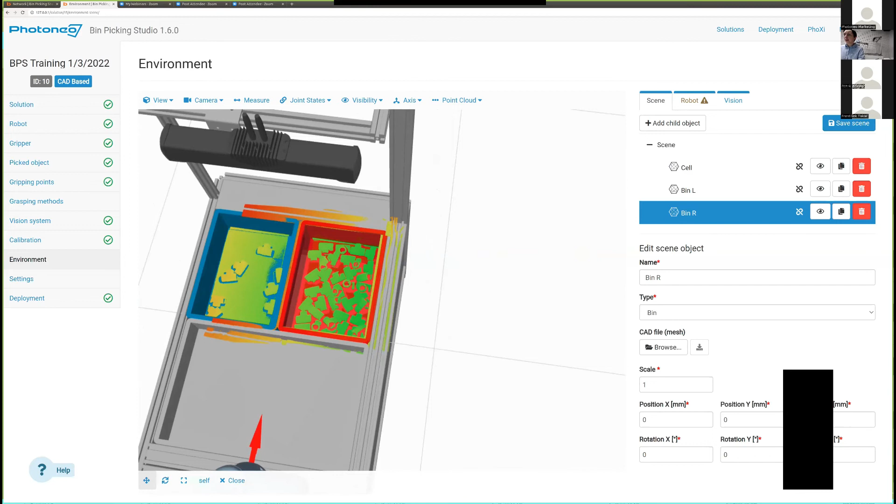Maybe the robot shouldn't be visible right now, so I can move it a little bit. Now it matches maybe better. Move it a little bit more. Maybe it's like that. Okay. And okay.

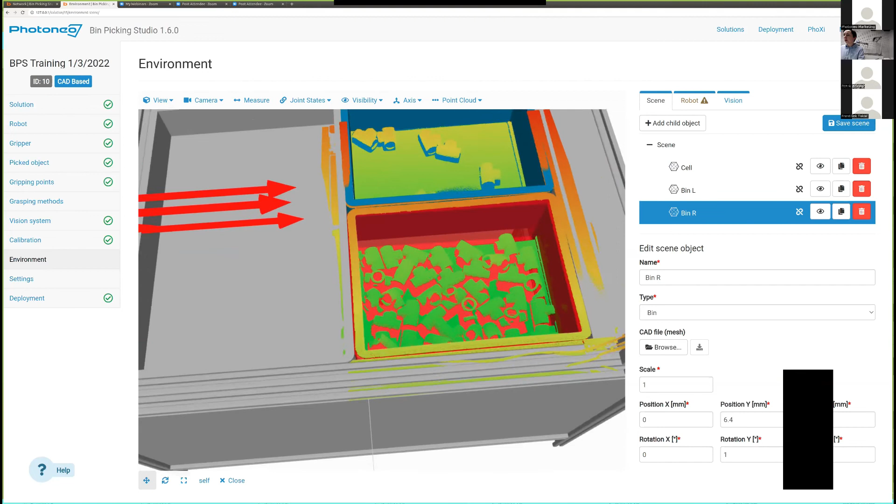Okay. My robot is back. And maybe there is a small rotation. And if I really need, maybe this is great. Okay. So I'm satisfied with it. And as you can see, there is a wall. So I don't want to hit the wall behind me. Okay, I will just check. Okay, I don't need to see this axis for now.

And there is a question. Is it possible to see the actual robot joint states in real time in the environment? Of course, you can enter the actual joint position, and I will just continue and you'll see. I will just move the robot to the start position, and we can check if the start position really matches with our environment. So thank you, Stefan, for your question, and you will see it in the next step. Okay.

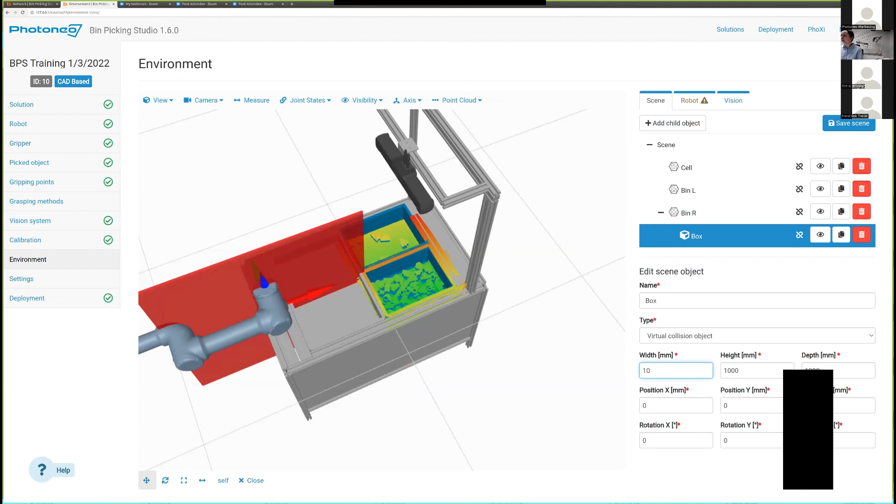Okay, we can continue. So I can add a wall behind the scene, some thin wall. And my wall is a little bit higher, like that. And we'll change depth, and we will just grab the arrows and move it. Yes, so a little bit more maybe. So I can check, yes, maybe this corresponds with the reality. And we will call it wall. Okay, so another object is added.

And another thing I can do is I can protect the scanner from any damage from the robot. So I can create another virtual object, and I will name it box because it will be a box, and the type is virtual collision object. So it's an object which is not actually existing, but it is good to have it.

So I will just make this object smaller because it's quite big. I will move it slightly. The right position. Maybe like that. Okay, looks good, but it's too small. So I think I have to change the width, so maybe 800 is too big. I don't need that. So 600 millimeters.

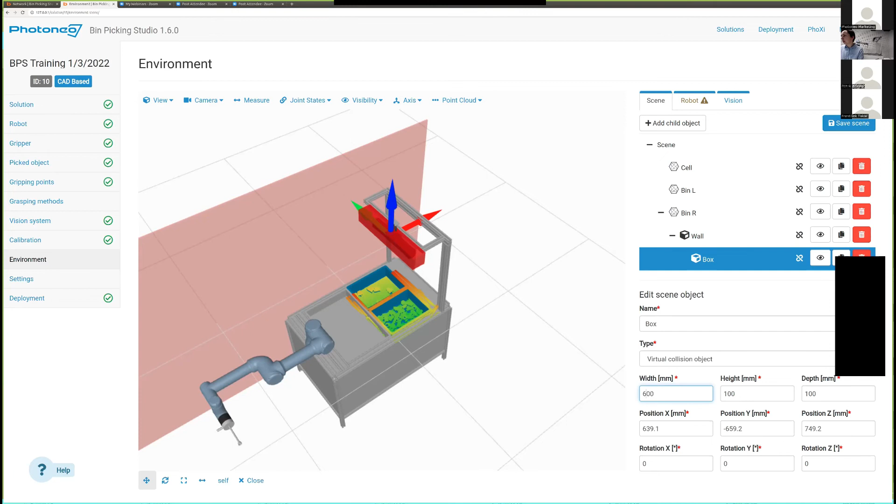So I created some protection box around the scanner. So this will be a collision object for my robot. It's a little bit bigger than my scanner. I can just put it down a little bit. So I'm sure that my scanner is 100% safe. When I'm satisfied with it, I will save the scene. So this part is done. We can go to the robot.

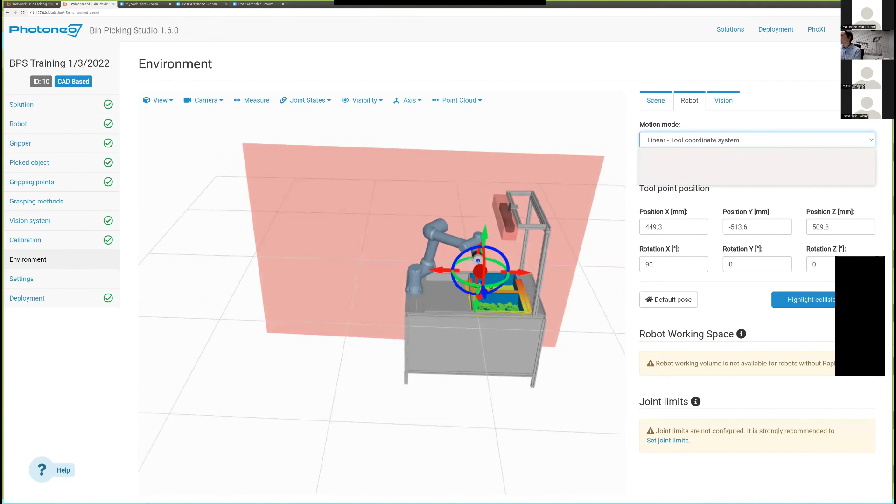There are a few options what we can do. Maybe it will be your answer, Stefan. So what can I do? I can really move the robot, I can use tool coordinate system, or there is also the robot base coordinate system. So I can just move the robot and see if it can reach the bin. What I will do now, I will move the robot exactly into the start position of the robot. You can just read it from the robot pendant, and I note these numbers.

It's 0, minus 1.57, minus 1.93, minus 1.15, 1.5, enter. And this is really the position of the robot, which is in the start position. Of course, you can move the robot, for example, under the scanner. You can read its position on the robot pendant, and then type the joints here and see if it matches.

So then I can see what is the reach of this first joint. So as you can see, this is the first turn, another turn. So the robot is able to do 2 full turns. It's really too much, and it's crazy because we want to move the robot from one bin to another. So as you know, the algorithm will calculate all choices the robot has. So I want to save some cycle time, and I will set joint limits.

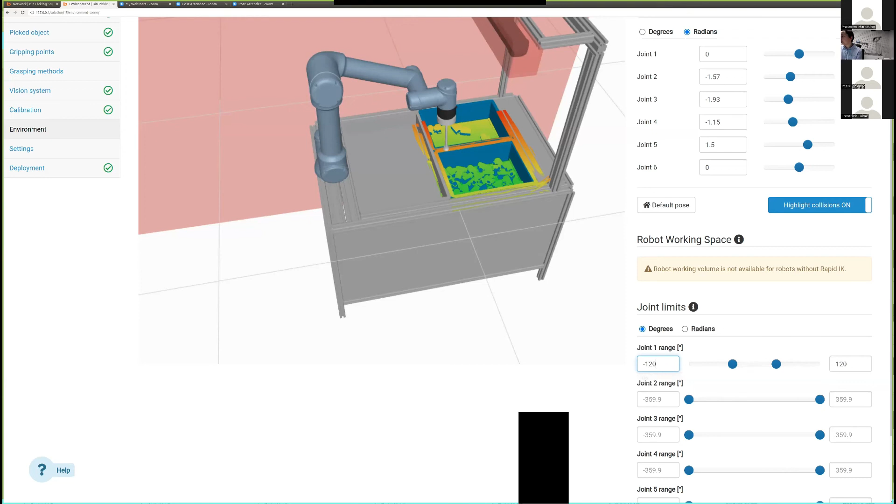So the robot will move with 240 degrees, and that's quite enough. I will save it, and now the robot's joint limit settings have been updated. So now when I turn with the robot, yes, it's from one side to another side. It's not the full two turns, which you can see before were not enabled. So this is my joint limit I want to keep.

Of course you can, for example, create a cell around the robot, but if you want to have really short cycle time, if you want your algorithm not to calculate for the whole volume, for all choices the robot has, it is much better to just add the joint limit and think about what the robot can do with it.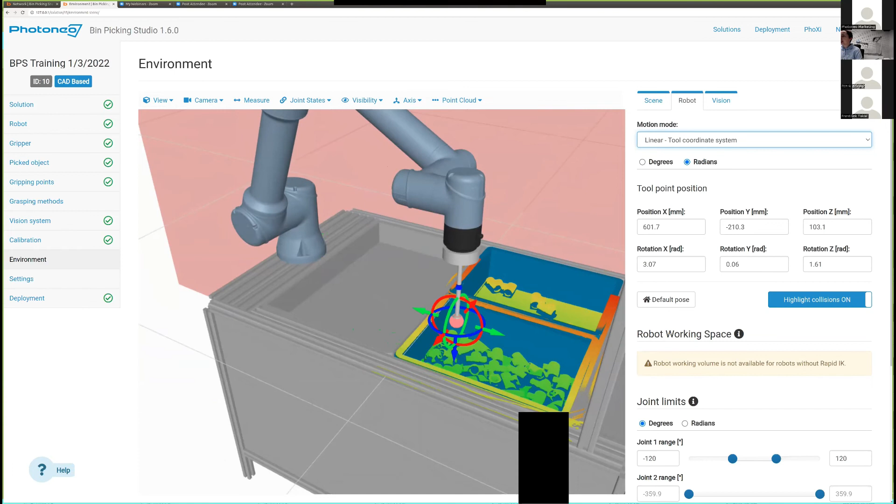So we can go to the tool coordinate system. I will zoom here. I will just check if my robot is able to go to the different parts of the bin. And here is the collision, but yes, it is really possible to reach the parts here or here. So it looks like it can really work with these settings. Okay, so I think, yes, this was saved.

This is done. We added the scene, we added the robot, we enabled the vision system to see where the point cloud is, and our environment is done. I can go to the settings. In general, when you are making your use case, you can tune most of the things in the previous steps, and you don't really need to touch the settings. So if you are making your first solution, please do not change these default numbers.

Maybe the only thing you can be interested in is this picking priority. You can choose your picking priority method. It can be the closest point of localized objects in a given direction, or the centroid coordinate of localized objects. So you can say if my localized object is really close to the robot, I can pick it first, or you can choose overlap of localized object with model if you want this parameter to help you pick the first object, or there is number of collisions with preference.

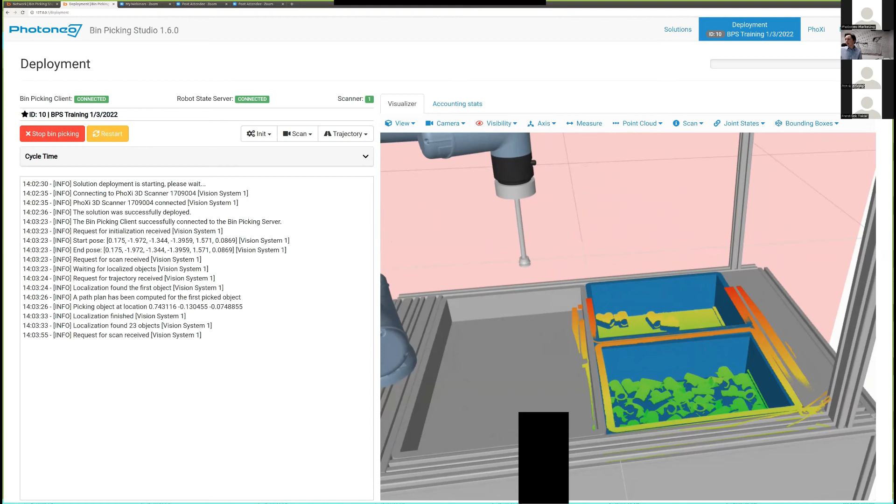So if you are asking why it's so slow, it's because we put the robot in slow motion. It's just 25% of speed, so it can go faster. But just to show you the process, it's going slowly so you can really see what's going on in deployment. That's why it's so slow. We will make it faster in a minute.

We can pick some objects so you can see that in deployment it really matches exactly what the robot is doing. So now it is going to de-approach, and then by joint movement to the end position, then detach the workpiece, and another path is already planned.

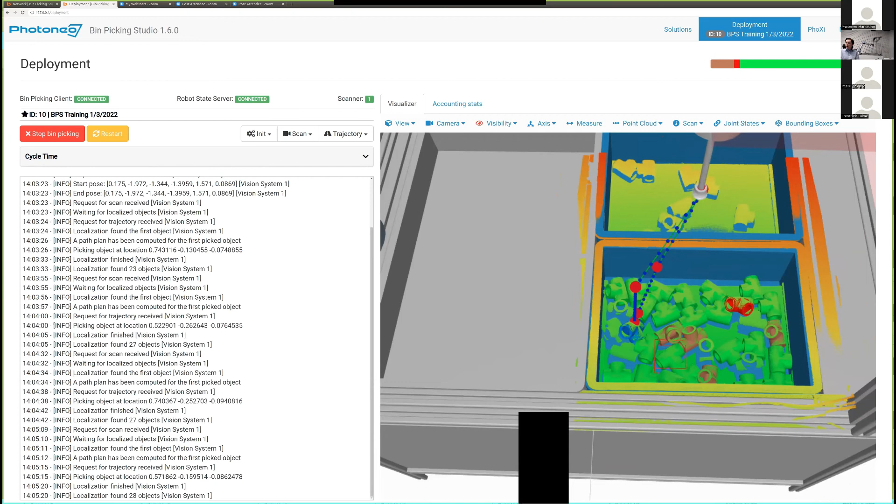So now it's going to pre-grasp. You can hear that the vacuum was activated. Now it is going to detach, de-approach, and from de-approach to the end position. The new scan is triggered. The parts are localized, and another path is planned for this workpiece.

So as you can see, some of the parts are different colors. The green ones are ready-to-pick workpieces. There is also the brown one, when the grasping angle was rejected. There is a red one, which is bad because the waypoint computation failed, and the blue one is the one which is picked.

Okay. So we can stop the solution for now, and we will stop the program.

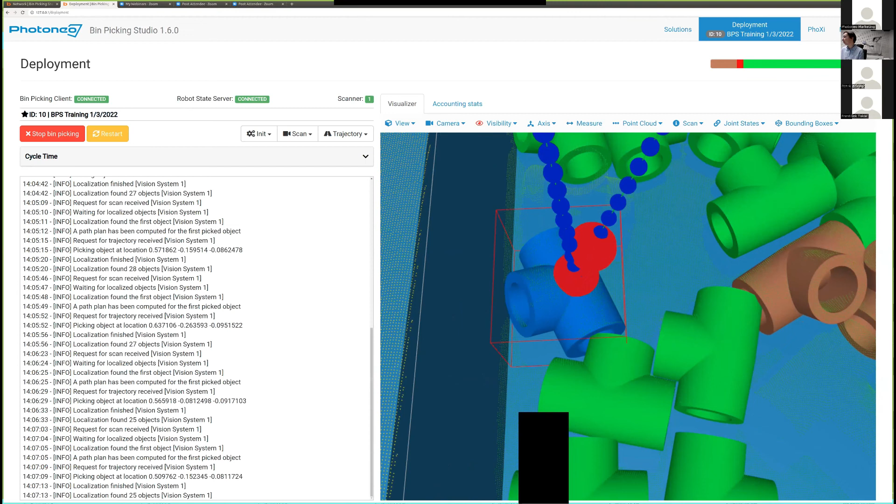So that's why we define the pre-grasp as this point where we call the procedure attach to start the vacuum, which will need maybe 1 or 2 seconds to start, and then we go to the grasp when the vacuum was already working, and we are sure that this vacuum is strong enough to grasp the object and pick it. So that's the answer to the question.

And then there is another question: what can we do if we have problems during the path creation? The question is, what do you mean by the problems? Because each use case differs. There can be multiple troubles, for example, issues connected with the objects. Some objects are not good to scan. For example, they are too shiny, so the point cloud is not so nice, and the localization is not able to really recognize the object in the scenery.

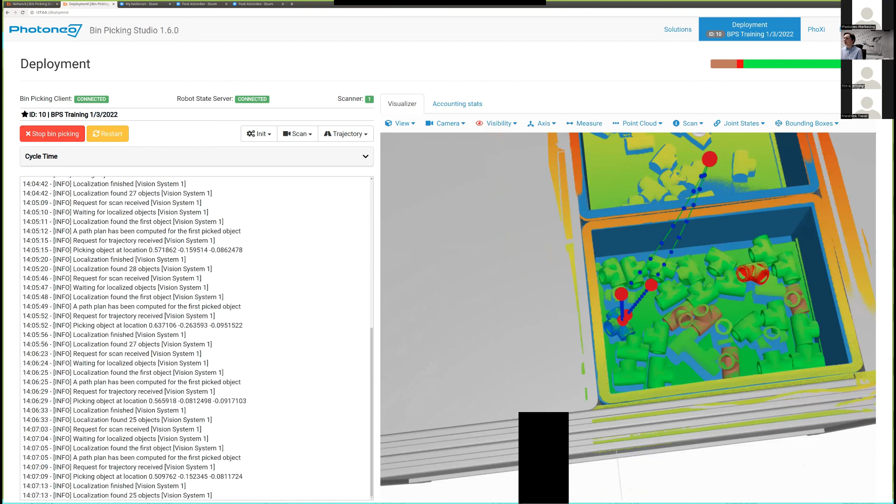So maybe you really need to tune your scanning profile, or the localization needs to be really tuned, because some of the objects can be, for example, flipped or moved. So there are a lot of earlier steps that can fail the path planning. Yes, this is choosing object to pick timeout. The path planning failed, for example.

It can happen, for example, that the localization needs more time to find an object, and there is no time for path planning. Then there is an error message for timeout. So you can prolong the time for the localization in this case, or you can define in your robot program a command called wait between taking the scan and the localization. So this is what you can do, but of course it depends on the situation. So I hope that this is what you were asking.

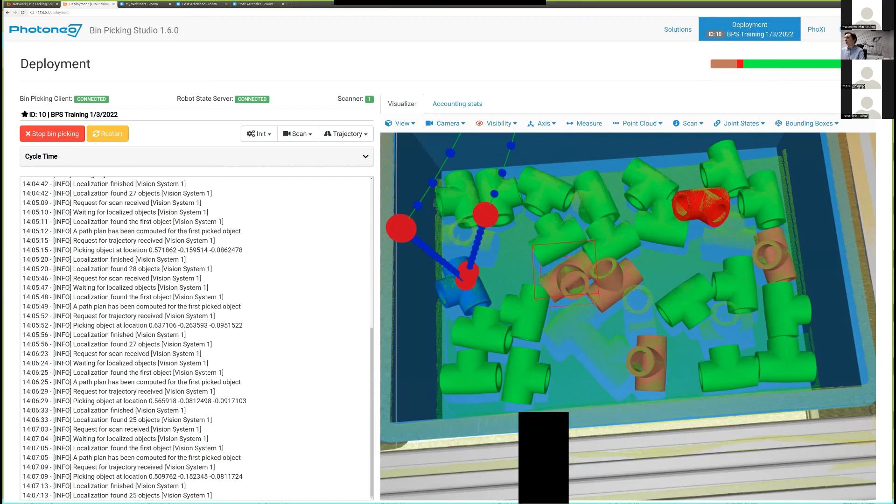You can find a description of these colors in our documentation, with exact information about what it means when your part has a brown color, and some recommendations on what to do to have more successful bin picking. But we have a very useful tool in our Bin Picking Studio, which is called inspector. So for example, for this part we can show the inspector, and this tool will tell you exactly what the trouble with this part is.

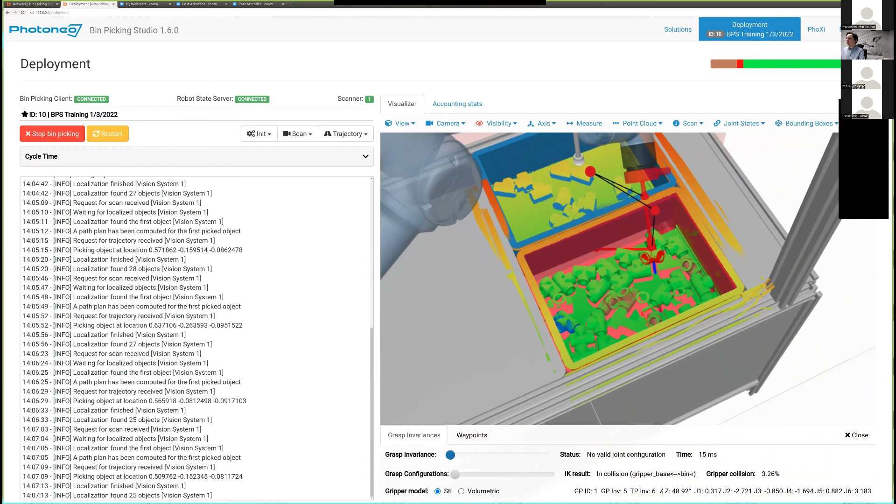Now you can see, I will try to zoom out and move it a little bit, that for this part there is no way to pick it out. Maybe if we pick the green parts around, it will move itself, but this gripping point is not reachable for the robot, because the gripper is in collision with the bin. But I believe that after these parts are picked, it will move down, and there will be some gripping point available, and the path planning will be successful.

So what can you see? There is a functionality called the waypoints. You can go through these waypoints and see each of the steps. So we can see that this is where the result is in collision: gripper base with the bin, right. So this is our right bin, and there is a collision with it.

In this part, you can see all the procedures which were called and exactly when they were called. For example, at 14.0520, the localization found 28 objects. The request for scan was received. We were waiting for localized objects, and so on. And then after the localization, the path planning proceeded, and the path was sent to the robot. So the robot was able to pick the object.

The new feature in bin picking is the cycle time, where you can see an overall average cycle time value. This cycle time is 37 seconds, which is really long. But for today's training, we slowed the robot down to 20%, so that you were able to see the robot movements corresponding with the visualization of the deployment. So that's why it is so long.

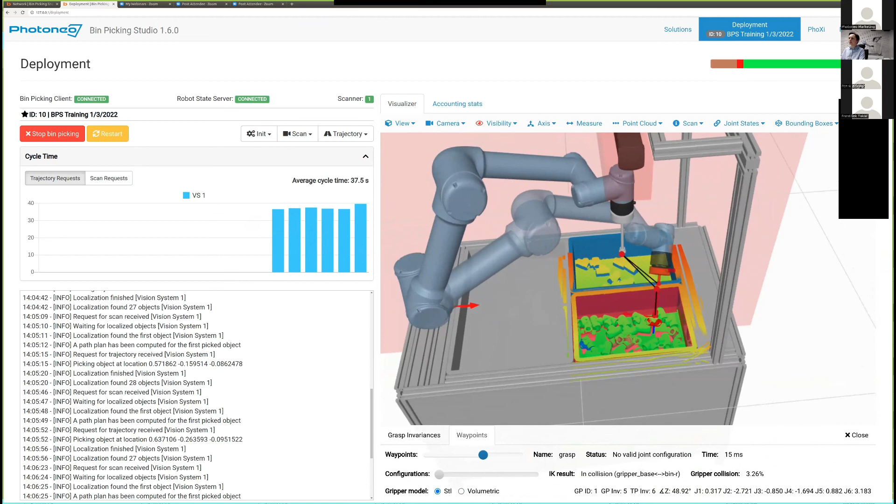And I'm just thinking if there's another one maybe. We can start the robot again and put it on a higher speed, so we can see the difference in the cycle time. Yes. Nice.

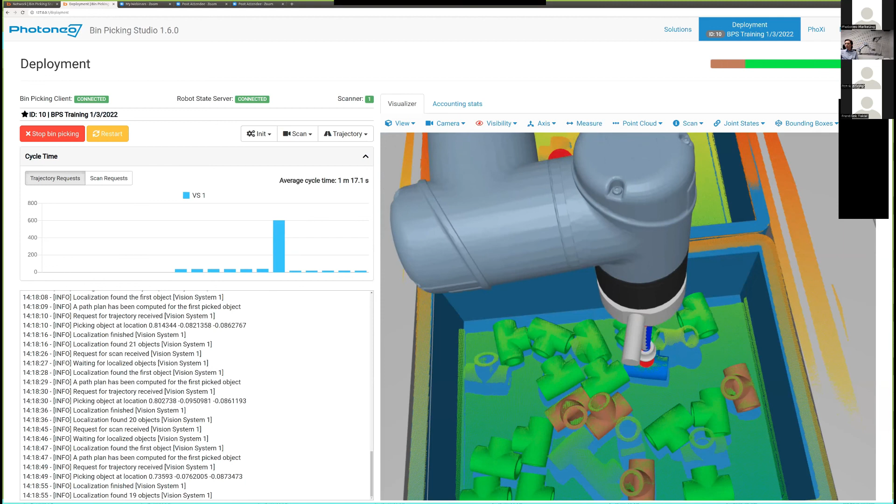So my colleague Patrick is on. Maybe would you like to say a few words about the new version of the bin picking? What are the key benefits? And maybe there is a question. So I will unmute my microphone and I will let you, Patrick, answer the questions. Thank you. Can you hear me? Thank you. We can get to the last question.

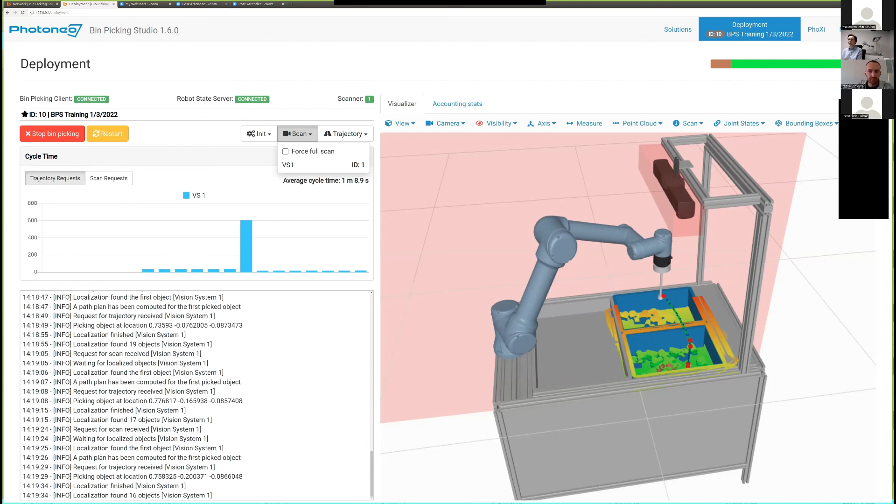I think what wasn't mentioned is also the option to display the volumetric model of the gripper. So Anna, if you could open the inspector for a part, you can see that at the bottom there is gripper model, and it's currently set to STL. Okay, please go to the environment tab and try it. Okay, select a part, please.

And now you can see that the gripper is represented by the volumetric model, which is the actual model with which we do the collision checking. So instead of the STL, you can display this model to have better insight into why the collision is happening. But in this case, you can see that only 0.06% of the gripper volume is in collision. So basically there is no collision. It is just the tip of the suction cup colliding with the picked part. So no collision is actually happening in the grasp waypoint.

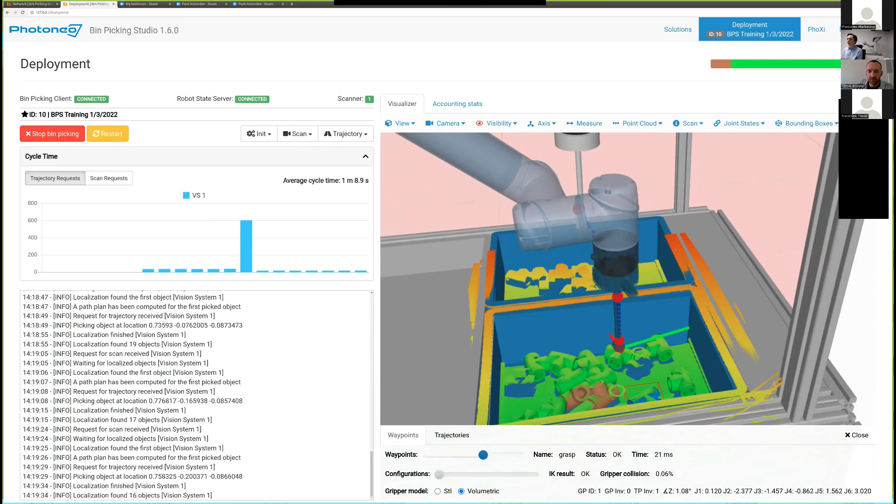Another feature that is new in Bin Picking Studio 1.6 is the ability to define multiple grasping methods. As my colleagues were saying, you can define different strategies for how to pick the part, the approach waypoint, but you can actually have more vision systems, and for each vision system you can define a unique grasping method. This can be beneficial in many scenarios when the parts are different, or when the bins have different shapes, when you need a unique picking strategy for each vision system.

We have a new question. Is the scene working exactly as walls, meaning the robot will always avoid running into collision with it? Yes, everything that is defined in the environment page as a collision object, I mean the cell itself, the gray base of the robot, the transparent walls, those are also collision objects.

Also, the model of the scanner is a collision object. It is a good idea to define a collision object around it just to be safe, but the actual model of the scanner is also a collision object, so the path won't go through the scanner. It is not possible to collide with the scanner or anything in the environment.

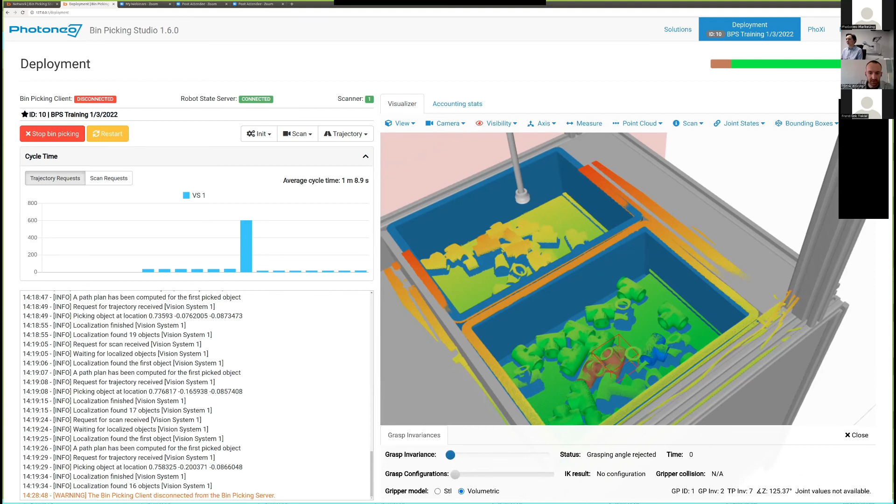If the problem is that the path planning is failing, then you need to find the reason, and the reason can be found using the inspector. So you just click the part. Usually the parts that are failing are red. As you can see, we have no red parts. Actually, we have only green and brown parts, and the brown parts mean that the grasping angle is too high. The gripper would need to be tilted too much from the z-axis of the world coordinate system.

Those objects will be pickable later when the objects around them are picked. So the brown objects will fall down and change their position and orientation, so they will become green. And regarding the red parts, that means that the inverse kinematics in the waypoint failed. That is usually because of a collision with the bin walls or the point cloud.

And when the path planning fails, that doesn't happen that much, because when the waypoints are computed, the path planning usually is successful, but it can happen, and then again you need to check the inspector, find the reason, and then navigate to the documentation. There all reasons for failing are described, and also some pointers on how to proceed, what steps you can take, what to check, what to change, and maybe you will find a solution to the problem.